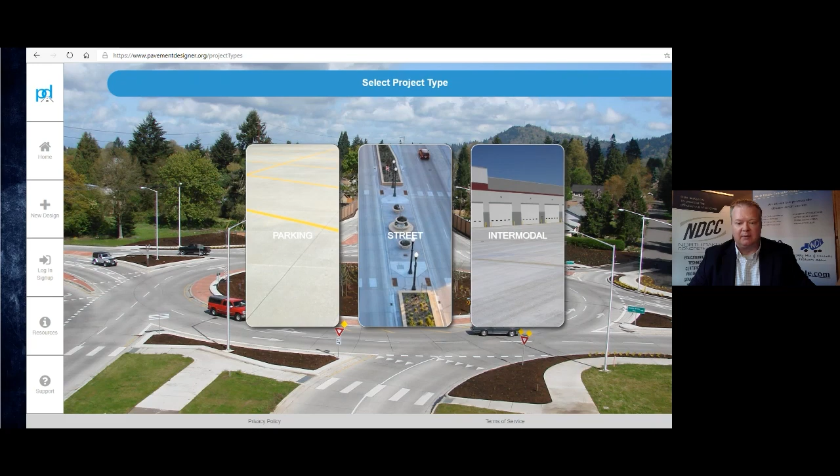We are fortunate to be joined today by Eric Ferrebee. Eric is the Director of Technical Services for the American Concrete Pavement Association. He's responsible for research projects and was one of the leading developers of pavementdesigner.org. In this capacity, he's not only helped develop the software, but he's conducted several training sessions for it, and he continues to be on the team that constantly reviews and enhances the program. Eric earned his bachelor's and master's degree in civil engineering from the University of Illinois at Urbana-Champaign. He also serves as the ACPA staff liaison with the Concrete Pavement Technology Center in Ames, Iowa.

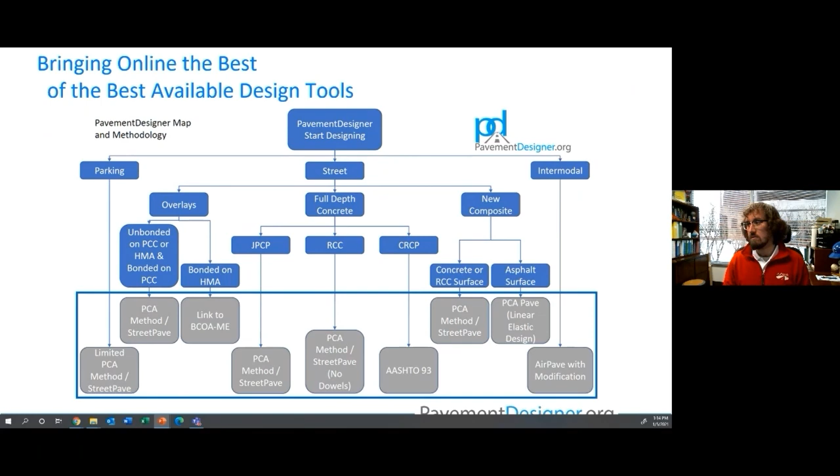Looking at our map, the first thing we're going to talk about today is parking lot design. How do we design a parking lot using pavementdesigner.org? Before we get to that, I always like to talk about the other ways we can actually design a parking lot. What are the ways you may have heard of or be familiar with that ring in your head before you think Pavement Designer, and how do they compare?

The different ways you can design a parking lot that you may be familiar with are AASHTO 93, Street Pave, or ACI 330 design guides. AASHTO 93 is more of a highway type design guide, and we'll talk about that when we get to streets and local roads, but it's not really something that trickles down well to parking lots.

We also have Street Pave, which, if you've ever heard of it, is actually the predecessor for Pavement Designer, but that methodology has actually been incorporated into Pavement Designer as part of our design process. So it's actually what's powering a lot of the designs in pavementdesigner.org. You'll notice the PCA method was featured on that map in the previous slide - that's what was built into Street Pave, and then Street Pave evolved into pavementdesigner.org, which is the free tool that now exists.

But the thing that's really made for parking lots besides Pavement Designer is these ACI 330 design guides that exist. There was one released in 2008, and I believe they're still working on finalizing the current guide. But these design guides are fairly limited in what you can do - you're really designing based off of design tables.

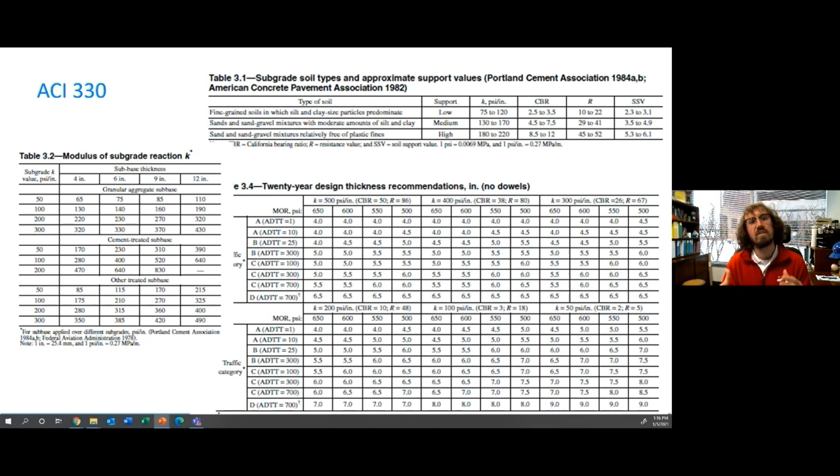You can see some of what those design tables look like from the 2008 guide here. So you're fairly limited on what you can do - you have limited sub-base sections, so limited structural support, also limited subgrade support as well. And you also have limited inputs in terms of the traffic type you're seeing and how much traffic you're seeing. So you're limited in what you can really do with those existing design guides.

So they're a good place to start if you've never designed a parking lot and you're looking for good information. ACI design guides have a lot of good information, but in terms of actually designing the pavement, it's a little bit limited in what you can do. Additionally, these ACI 330 design guides are actually based on the same methodology as Pavement Designer - the 2008 guide was based on Street Pave design runs.

The new guide that's just coming out is actually based on Pavement Designer design runs, so it'll be a one-to-one comparison if you're looking at the ACI guide versus pavementdesigner.org. It's actually the same design methodology. Pavement Designer is a really robust tool for designing parking lot concrete pavements.

A little bit about Pavement Designer's methodology for designing concrete pavements: it's using a modified version of the Streets module that we'll see a little later on. It's modified for simplicity's sake, and to be more focused on the type of loading we'd see for parking lot facilities. If you compare the parking module versus the street and local road module, it's a little different, but based on the same methodology. A little later on I'll tell you the exact differences so you can better understand that.

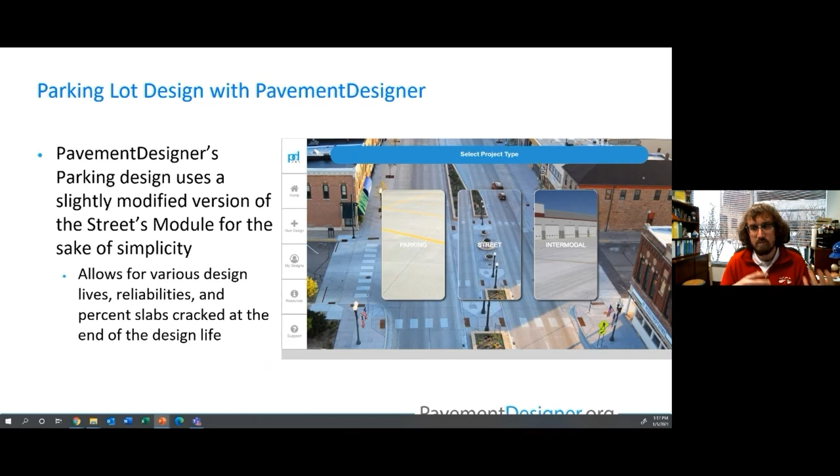All right, so let's take a look at a parking lot design using pavementdesigner.org. We're going to keep it a really basic design where we're designing for a bus terminal that serves about 50 buses a day. We know we have an existing subgrade that's a clay soil, fairly weak type soil, something we typically see here around us in the Midwest.

All right, let's switch over to pavementdesigner.org. As I mentioned, it's a free tool, so you can go to pavementdesigner.org and start designing without even creating an account. You don't need to create an account to start designing concrete pavements with Pavement Designer — you just have to go to the website.

Now, I have created an account. I've used it quite a bit because I do pavement designs quite a bit. When you do create an account, all you need is an email and a password — we don't require any extra information. So it's fairly simple to sign up and create an account.

The big benefit of creating an account is that you can save your designs online and access them from anywhere, any computer that you have. So it comes in handy. We'll see the My Designs features in a little bit, but let's go through and actually do that parking lot design that I just described.

So the first thing we have to do is start designing. We click on Start Designing, and you'll see we're brought to our first decision point. The first thing we have to do is select what type of project we're going to do: parking lot, street and local road, intermodal, or industrial type facility. If you hover over any of these tiles, you'll see a little flip screen that gives you more detail on what's featured within each of these modules.

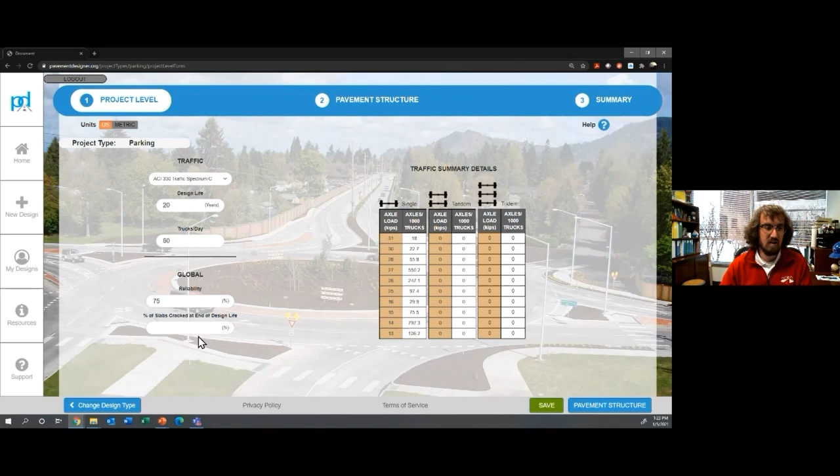And our percent slabs cracked is going to be somewhere around 15%, maybe 20%, depending on how conservative you want to be. So I'm going to say 15% slabs cracked at the end of my design life. Now that I've filled in all of my traffic and global details on the project level, I can move to my pavement structure details.

In my pavement structure details, I need a little information on the subgrade, the concrete materials, as well as the structural layers in between my concrete surface and the subgrade, so the sandwich layers in there. Now, all that I know about this facility that we're designing for right now is that I'm designing on an existing subgrade that's a clay soil, so it's not a very good support system.

So in the parking lot module, you can see that we have a few descriptors that are describing various soils. We have this first one that's silts and clays. We have this one that's sands and sand gravel mixtures, and then sand gravel mixtures that are free of fine particles. So we know that we have a clay soil, so we're going to be in this low support realm, and we can just select that.

And so when we do that, it's actually going to populate our subgrade CBR value and give us a resilient modulus. So if we actually have a subgrade value that we know, we can go in here and override that, say it's a CBR of 4. In that example, you can see how it's going to change where that support system is. I know that I'm going to design for a CBR of 3 in this example.

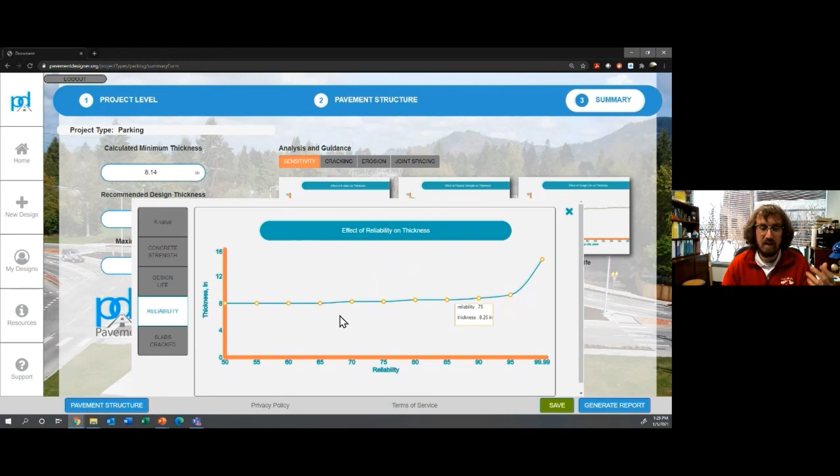We also have—we can see how the design life changes this, we can see how the reliability changes this. As I mentioned, we probably don't want to go too high with our reliability, as this is a low volume, low speed facility that's not seeing a whole lot of traffic, so we're in here around 75%. If this was, say, a collector type facility or an arterial, we may be up in the 90 to 95% range, and we may see some additional thickness required.

And then we have percent slabs cracked, kind of the inverse of reliability. If we want to have very few percent slabs cracked at the end of our design life, we're going to need some extra thickness—of course, then we're not really failing the pavement at all anyway.

We also have cracking and erosion tables, and I'll talk about these when we go through a street design. We also have joint spacing, which gives you an idea of how the joint spacing was actually calculated. Where does that come from? Why are we recommending 15 feet? Why not 17 or 18 or 20? Or why not 14 or 13? This gives you a little bit of information on how that was calculated.

On Pavement Designer, you can actually generate a report as well. If I generate a report, I can provide some additional information like design name. In the parking example, you can provide a designer's name, route, zip code, owner agency, a little bit of extra information, and then click download and view report. If you have a pop-up blocker on, you'll have to disable that for Pavement Designer. You should get the report right there on your screen, and you can see all the different layers and all the different inputs we had throughout the design. It'll also download to your downloads folder, so you can have a copy of that design report.

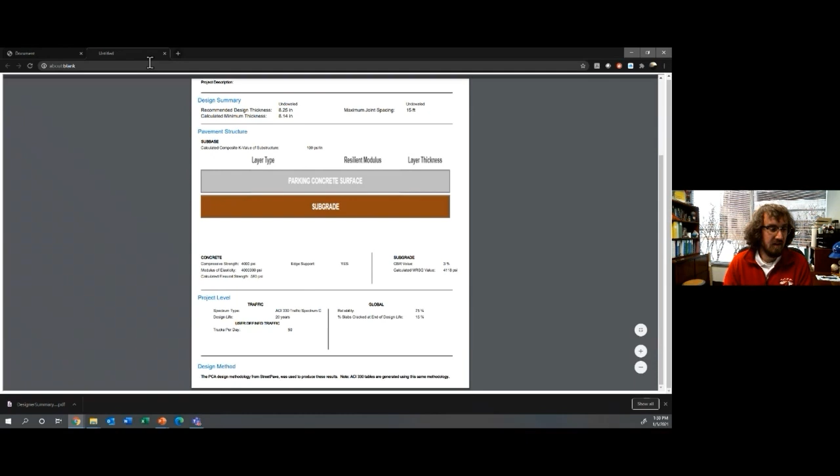If you're logged in and you've created an account, you can also save this design, and that'll save the whole design for you. You can see I already typed in the design name. I can choose a project folder, or create a folder, and save it. If I want to come back to it later or talk to somebody about it, I can save it if I've created an account, and then access it in my designs. Within my designs, you can see I've used Pavement Designer quite a bit, and I have quite a few folders with various examples.

I just saved this parking example here, and you can see it's saved down here. So when I have those saved designs, I can either go in and edit those designs, or I can actually create a duplicate of it if I want to change one of those inputs and keep a copy of both designs.

I can actually send this to somebody. So if I wanted to share it with Art and say, hey, can you take a look at this? You can type in his email address and it'll send him a copy of it, and then he can look at it and tell you what he thinks, or he can send it to me and I can tell you what I think. And then you can delete these designs as well.

So you have a lot of features that you can access by just creating an account with your email and password, and that's all we require to do that. It's fairly easy, and it's got some good extra resources there too.

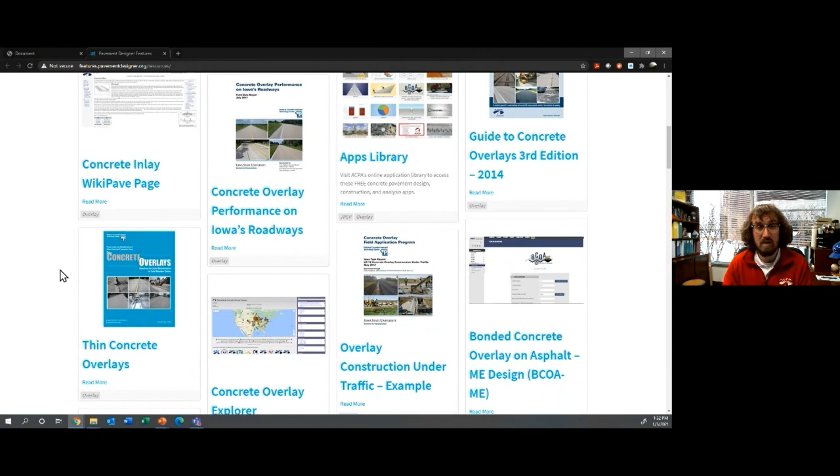Speaking of resources, Pavement Designer has a fairly good library of resources related to pavement design, covering all the different types of designs that Pavement Designer can do. As I mentioned that map earlier, you can see the Pavement Designer map and methodology right there, one of the first things we have. We also have some intro videos in case you want to rewatch me going through one of these designs, which will give you a little detail on how to do that. There are a lot of good resources from ACPA and from the Concrete Pavement Technology Center as well. All of these are free, great things relating back to pavement design.

The other thing I want to show you on our first tour of Pavement Designer is the support section. This is a place where you can find the contact information of the national associations that contributed to the development of Pavement Designer, as well as all of our state associations. Say if you're designing outside of North Dakota and you're looking for Art's counterparts somewhere else, you can go here and find the contact information for those various states depending on where you're working on a design. So another good resource on pavementdesigner.org.

Alright, so that's our first tour of Pavement Designer, and it goes through the parking lot module.

So we've gone through the parking lot module. Next up, let's talk about the street design module, and how we design concrete pavement streets and what all is featured within them.

With designing concrete pavements and streets within Pavement Designer, you have a lot of different things you can design for. We can design for conventional jointed plain concrete pavement, for overlays whether bonded or unbonded, on asphalt or on concrete - it doesn't matter, you can design it with Pavement Designer fairly simply. We can also design RCC, continuous reinforced concrete pavement, and composite pavements as well. So there's a lot of versatility within here.

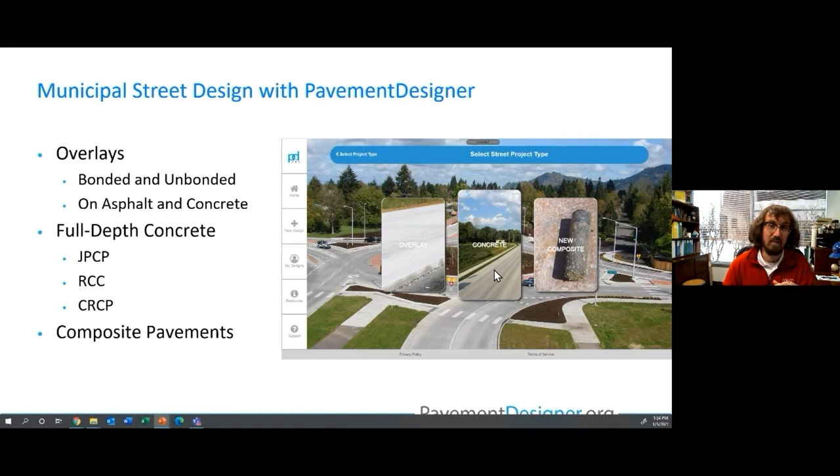If we're designing a street and local road, we're doing full depth concrete, as you see in this picture, and we'll see how that looks in a little bit. We're going to focus mainly on jointed plain concrete pavement here, but know that the same design process applies - you'll see basically the same steps for each of these different types of facilities. You may just have some extra inputs to deal with depending on the type of design, if it's not a conventional full depth concrete pavement.

Similar to parking lots, let's talk about some of the other ways we would design municipal streets and local roads that you may be familiar with, and what some of the benefits and drawbacks are of those design methodologies.

Here we're going to talk about AASHTO 93 for a few minutes. We're also going to talk about AASHTOWare's Pavement ME design tool, which is kind of the Cadillac, the best way to design concrete pavements that exist these days. There's also the ACI 325 design guide and StreetPave. So let's go through these briefly and talk about the differences and the benefits and drawbacks.

Our first one is AASHTO 93. If you've ever done a pavement design, you've probably either used AASHTO 93 or at least heard of it. As the name implies, it's been around since 1993 - nearly as old as I am, so it's getting fairly old, but it's actually way older than that. AASHTO 93 is based on the AASHTO road test, which was performed between 1958 and 1960.

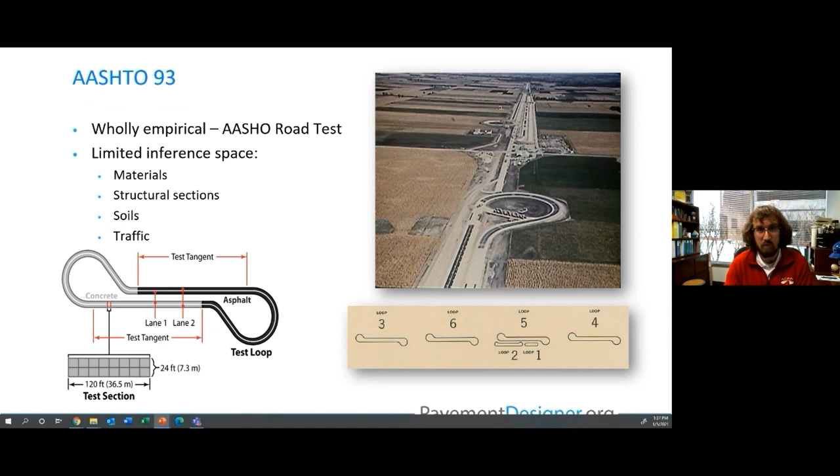It's based on a very limited inference space. We had limited materials local to Illinois, limited structural sections - with 6 test loops we didn't have an extensive amount, around 360 concrete sections, a reasonable number but not huge - and again local to Illinois with Illinois materials and soils. We only had 2 years of traffic data, so not a whole lot of traffic information either. So we had limited structural sections, limited traffic, and limited observations, and that's what's built into the AASHTO 93 design guide.

You can see examples of the asphalt and concrete sections here - notice a lot of the concrete sections were fairly thick. This is because the AASHTO road test, and the AASHTO design guides, were really focused on highway type pavements, built for interstate type facilities and very heavily trafficked roadways. So our concrete sections tend to be thicker, and you'll see why that's one of the drawbacks in a few seconds. You can also see some of the trucks loaded on the AASHTO road test - after those 2 years they had about 1.1 million load repetitions of these types of trucks.

So a fairly limited amount of data that we're actually designing with. Now, at the end of the AASHTO road test, here's one of the big problems with the AASHTO 93, the older AASHTO design methodologies. About 30% of our concrete pavement test sections were failed, so 70% were still in decent condition. Now that's a big problem when you're doing a road test, because you're trying to get a full performance characteristic history of how concrete pavements perform throughout their life. So if you don't fail your test sections, how do you know how your pavements are actually going to perform?

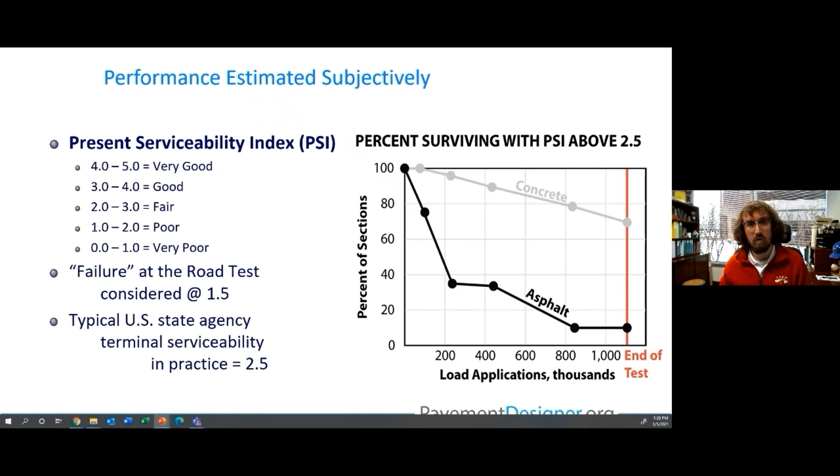This is a big problem with the older AASHTO empirical design methodologies. They're based on a limited inference space where we don't actually know how the concrete pavements are going to perform, so we had to predict how they perform. We have different projections of how this would actually look. Now we're designing pavements for up to 100 million design or load repetitions, way outside of the inference space of the AASHTO road tests. That's a big problem with using the AASHTO 93 design guide for designing concrete pavements - we really had to project how pavements were going to perform outside of the inference space. And so that's a problem.

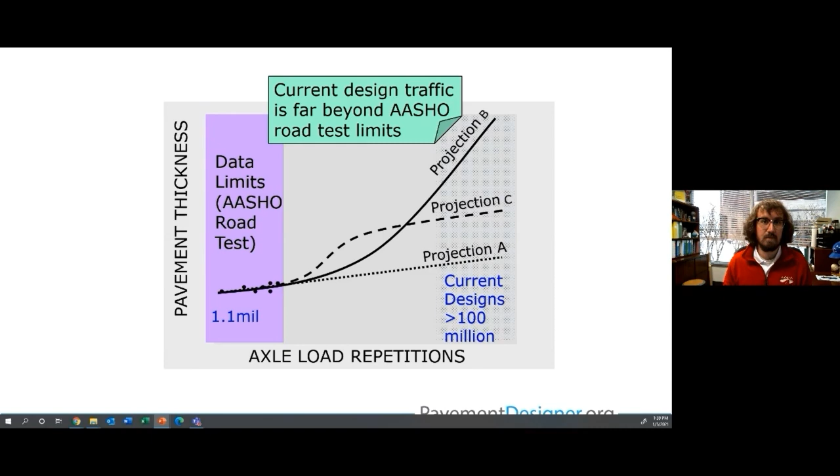And so that's why AASHTO created Pavement ME Design, the new pavement design tool for designing concrete and asphalt pavements. But Pavement ME is really made for federal and state agencies. It's made for high-level highway type pavements, interstate pavements. It's not really made for streets and local roads and parking lot types of facilities. So it's a great design tool, and it's really kind of the best way to design concrete pavements, but it doesn't really lend itself well to trickle down to smaller type facilities or agencies that don't tend to do pavement design a whole lot. It is fairly complex.

That's one of the reasons why we don't see Pavement ME adopted. It hasn't been adopted by all of our departments of transportation. It also is not trickling down to cities, county highway departments, and some consultants that don't do pavement designs all the time as well. Additionally, it's fairly expensive - one license for one year of Pavement ME is around $6,000, so it's very expensive. But again, it's for more of the DOT type facilities, which is why we don't see it used all the time.

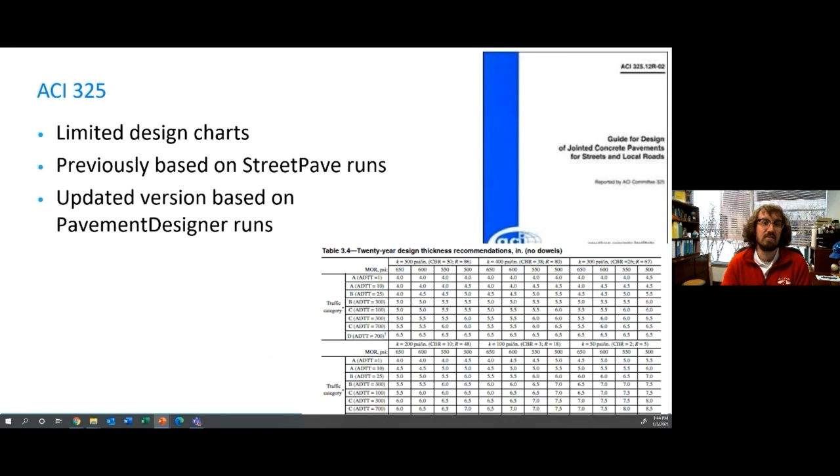So let's talk about Pavement Designer and where its roots are in terms of design methodology. Pavement Designer for roadways dates back all the way to the 1960s. We originally developed this back then, called the PCA method. It's evolved and we've improved it over time.

In the 1980s, there was a big step forward when we introduced erosion into the design model. Then we released it as StreetPave in the 2000s, updated it again in 2012 to become StreetPave 12, and now we've released it for free as pavementdesigner.org, featured within there.

It's a fairly robust tool that looks at failure criteria such as cracking, faulting, and erosion, which is good because that's how our concrete pavements actually fail. If we revert back to AASHTO 93, we're really designing based off a serviceability index, which groups all the stresses together rather than actually looking at the stresses over time. Here we're actually looking at the stresses, cracking, and erosion.

This design methodology was more tailored for streets and roads. We basically recognized that the AASHTO road test was for highways, so we needed a design methodology for streets and roads, and so the PCA method was born.

Pavement Designer has actually been approved by the Minnesota Department of Transportation for their cities and counties, and this was fairly recent. They just released this in November of 2020. They did a research study and looked at how it compared to their own in-state design module, MnPAVE Rigid, found it was comparable, and now allow for the use of pavementdesigner.org.

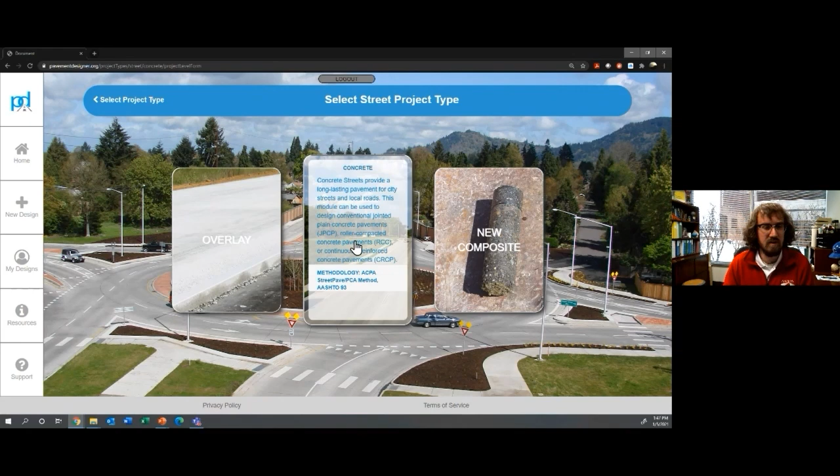So if I go into my full depth concrete pavement, you can see we're back to our 1, 2, 3 step process: project level details, pavement structure details, and summary details. First thing we have to do is select a traffic spectrum. Now, all I know is I have about 100 trucks per day. It might be a collector, it might be a minor arterial, I'm not really sure, so I'm going to go ahead and turn on help screens.

So you see this help question mark here on the top right, you can turn this on and off. I usually have it off because I use Pavement Designer quite a bit. So you can turn it on.

Every time we turn on the help screens, we have these hoverovers that give us a little information about the input. But if we click on more information, we can see we've got a lot more detail on what this input actually is.

So I know I have about 100 trucks per day. If I look in my traffic, my average daily truck traffic, 100 falls between 40 and 1,000. So I'm going to say I'm a collector type traffic category.

So I know my traffic category now is a collector. You can see I've got a few more traffic spectrums within the street module. I can also add a custom traffic spectrum in here as well. I believe you have to create an account and log in to do that because it saves on your account, but you can do it.

Next thing we have to do is determine our design life. Again, we have to determine this as designers. So I'm going to say 30 years. I know I've got 100 trucks per day.

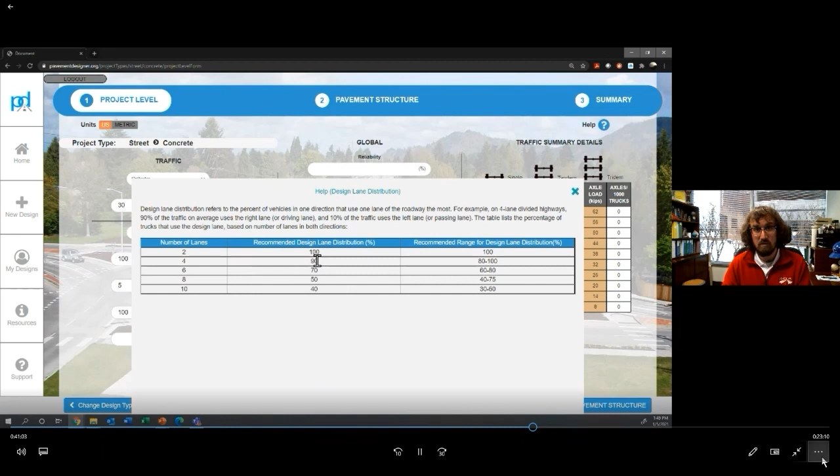Similarly with design lane distribution, if I have 2 lanes going in my northbound direction, I may say 90% are in my design lane and 10% are in my passing lane. If I click on more information, I can see if I have a 4-lane facility, 2 in each direction, I may have 90% in my design lane, 10% in my passing lane.

So let's say I have a 4-lane facility with 2 lanes in each direction. I'm going to say about 90% of my traffic is in my design lane, and 100% of those 100 trucks are in my design direction.

So last thing we have are reliability and our percent slabs cracked. Let's take a look at reliability. For a collector, it's probably going to be somewhere in the 85% range, which is exactly what we see here within our help screen. So about 85% for our collector would be a good starting point.

Once we get to the summary, we can see how all of these inputs impact the design, and we can change this with those helpful sensitivity plots. So the next thing we have is our percent slabs cracked, and it's going to be about 15%, somewhere 10 to 15% is usually pretty good.

One thing we didn't have in the parking lot design that we have now in our street design is calculated traffic results. This is basically taking that 100 trucks per day and 5% traffic growth rate and those directional and design lane distributions, applying all of that over 30 years and averaging it out for a daily traffic it's designing for, about 200 trucks a day. If we look at how many trucks over the entire design life we're designing for, we're at about 2.1 million.

All right, so we filled all that out. We can go on to our pavement structure. Here we can determine if we're doing a full depth jointed plain concrete pavement, which is our conventional concrete pavement, or RCC or CRC. So we're going to just stick to jointed plain concrete pavement.

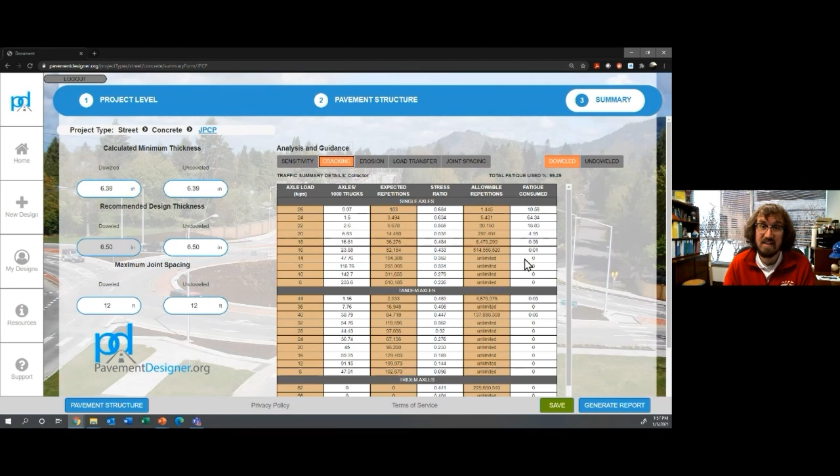If we look on the erosion, the faulting side, you can see here that we're not consuming a whole lot of our erosion life, and this is because we're in a doweled scenario. If we switch over to undoweled, you can see a little bit more faulting and erosion, but it's still not significantly high. So that tells me that we're really failing because of fatigue -- we're failing by cracking rather than faulting. So you can see here, tandem axles tend to be more damaging on the erosion side.

Okay, so we still have all of our sensitivity plots. We have our load transfer tab. We also have that joint spacing tab telling you how this was calculated and why this is our recommended maximum joint spacing for this design scenario. So we've got a lot of good information to help inform the design that you're doing, a lot of good information here as well.

So we still have our generate report. We can also save if we've logged in and created an account, and we can go through in here and go back and change any of our inputs that we had, and go back and edit our design however we want. So a lot of good freedom in terms of what we can do with PavementDesigner.org.

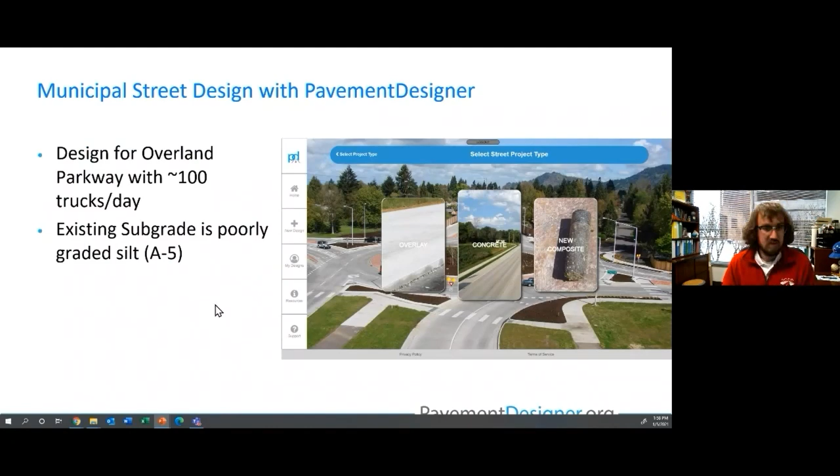So let's go back to our presentation. Let's take a look at another design example.

And so this is an actual design that I received, and somebody said, hey, can you look at this AASHTO 93 design and tell me if you think this is realistic, knowing that what we've seen over the years is that AASHTO 93 tends to result in overly conservative, unnecessarily thick concrete pavements for various types of designs.

So the design that they had was about 8,000 trucks, or around 20 million ESALs, if you're familiar with AASHTO 93 -- doesn't matter if you're not. They also had a 90% reliability with 5% slabs cracked. They had a 6-lane facility.

They had an R value of 20, that's defining the subgrade. They had a modulus of rupture, or flexural strength, of 630 PSI with an elastic modulus of our concrete of 3.5 million. They assumed edge support, so they had a tied concrete shoulder or a widened slab. They had an asphalt subbase on a cement stabilized subgrade, and they assumed a K value of 160 PSI per inch.

Okay, so the AASHTO 93 design that was performed came up with 11 inches of concrete. So real quick, let's go through and see what Pavement Designer comes up with in this type of design.

So let's start new design. Oh, don't want to save. Let's go ahead and start new design. Go ahead and start projects. I'm going to go to concrete pavement streets, full depth concrete pavement. And all right, so we're going into our design.

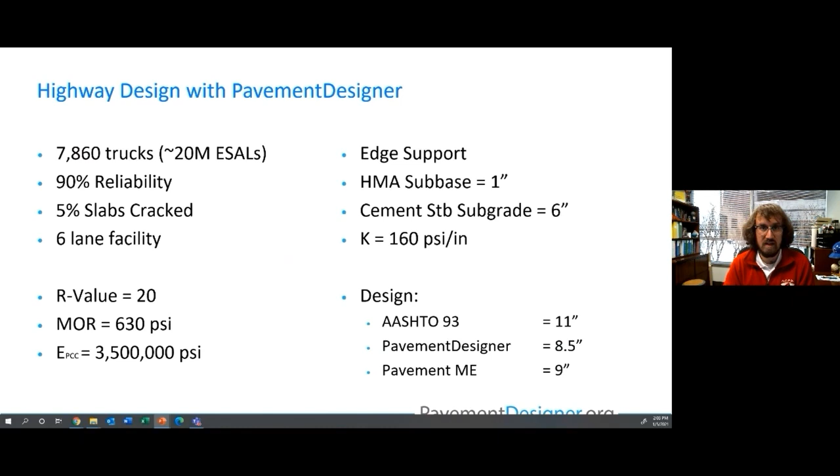I did both of these designs, one with Pavement Designer and one with Pavement ME. With Pavement ME, the cracking is kind of what's driving the design, it's what's getting closest to failure, but still they only predicted 9 inches of concrete was required for this type of design. So it's really great to see those two lining up, because they're both mechanistic empirical approaches to pavement design, so they result in pretty realistic numbers for the pavement design.

All right, so the last thing I want to touch on with the street design module, and I'm going to go quick through this because I'm running out of time and I've got one more thing I want to cover, is there's a module within Pavement Designer where you can estimate the traffic given an existing asphalt design. So let's say you're a county and you know that your typical pavement design is, let's say, 3 inches of asphalt.

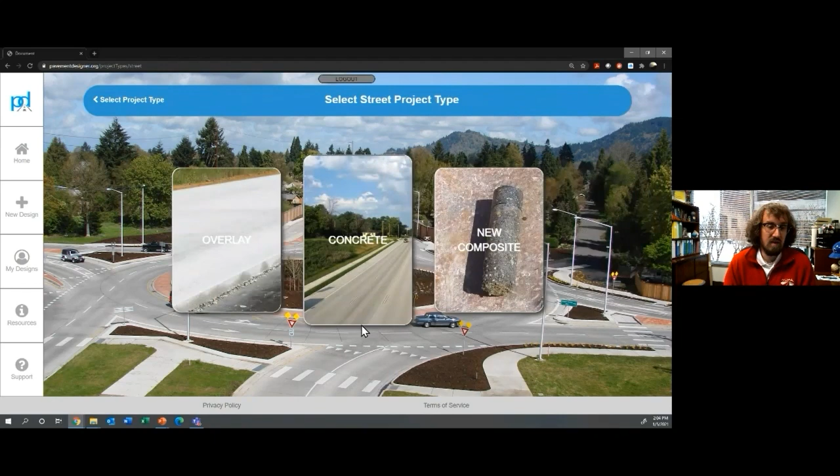Let's do what I've got printed here: 4 inches of asphalt on 8 inches of granular base, with a resilient modulus of around 4,000 PSI for whatever you're designing for in this case. So if that's all the information you have, you don't typically do a pavement design, you just stick with that example, 4 inches on 8. You may be used to using that, but you may also want to see what a concrete alternative might be for that type of facility.

So if you want to do that type of analysis, where you want a concrete design that's comparable to that, you can see in here, if we go to, let's say, a collector type facility and we know we want it to last 20 years, we can go in here and instead of doing user-defined traffic info, we can actually estimate it from an asphalt design.

So this is going to take that existing asphalt design that you may be familiar with, that may be what you always pull out of that 4 inches on 8. And it's going to figure out how many trucks a day that pavement is going to hold given that 20-year design life.

So I said granular base. The layer coefficient for granular base is usually around 0.14 to 0.16, and then a thickness of, let's say, 8 inches. This is going to be based on AASHTO 93, because AASHTO 93 is kind of the main design used for asphalt pavements for this type of facility.

And let's say we've got a resilient modulus of 4,000. So you can see the other types of inputs that we need for an AASHTO 93 design. So it's going to actually calculate the structural number, calculate the flexible ESALs, then calculate the average trucks per day and the trucks over the entire design life.

So it's calculating that based on that assumed 20-year design life that we have and the type of traffic that we have here. It's basically saying that if we want this pavement to last 20 years, based on AASHTO 93, we would assume that it's only going to carry about 50 trucks a day. So that's kind of what's going on here.

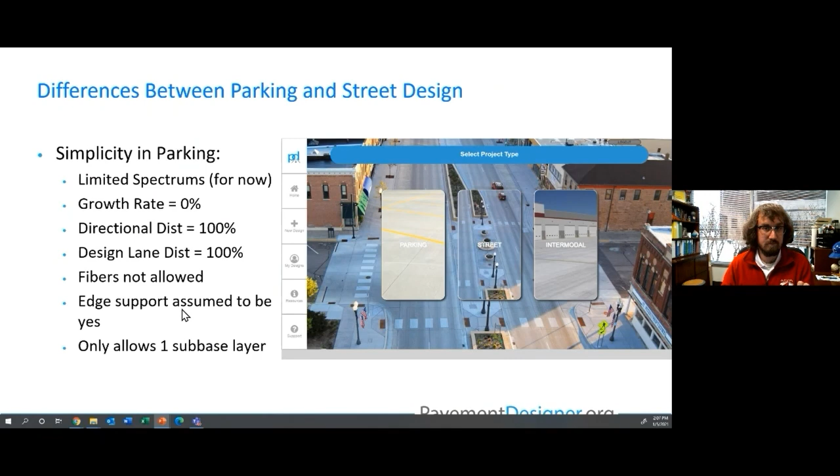So if you copy these in your street design, it will exactly match up with the parking lot design. So that's a little bit on the differences between the parking and street design.

Okay, so last thing that we're going to cover, we're going to talk briefly about the intermodal design. Now, before we get into this, I should mention that we are in the process of updating this, making it a little more user-friendly. So if you've used it before, or if you're looking at it now, you may see that it's a little more complex than the other designs that we've talked about. But we are working on making that a little more user-friendly, so look for those updates sometime here in 2021.

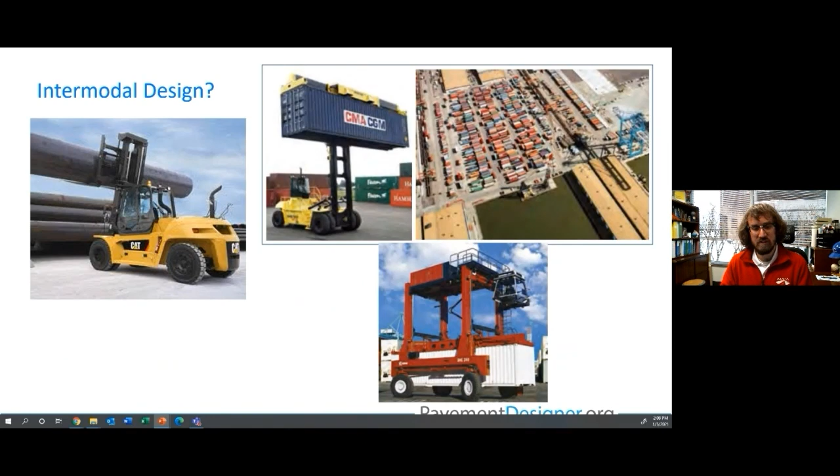So intermodal design within Pavement Designer is really looking at designing for really heavy type vehicles like forklifts or container loaders. It's not really looking to design for over-the-road traffic like your conventional trucks. If you're doing a facility that's just designing for trucks, but it's an intermodal facility, use the parking lot design or the street design—that's going to get you your best design. This module is really for these types of vehicles, your forklifts, any type of non-over-the-road vehicle that still has pneumatic tires that may be significantly overloaded. It's designed for those types of vehicles.

So you can see the other ways that we can design these intermodal or industrial type facilities. ACI 330 does have a pretty good guide that goes through how to design for these types of facilities and the things you need to watch out for. They do actually list ACPA StreetPave, which again is the precursor for Pavement Designer. They also list Pavement ME, which we've talked about—great design methodology, not really great for designing for forklifts and container loaders and stuff like that.

And they also list TC Pavements and OptiPave, which is a good tool. It's not used a whole lot in the US, but it is used quite a bit in South America and other parts of the world. And then they list ACPA's AirPave.

ACPA's AirPave is actually developed for designing aircraft, but it can be used for designing these types of vehicles where you have some odd shaped loadings, odd tire and stress distributions. That's what's actually used in the intermodal industrial design within Pavement Designer.

Let's do a real quick example as we're finishing up here. We're going to design for a Cat 986 loader, 130,000 pounds, 12.5 foot wheelbase with 10-foot axle width, and a tire pressure of 90 psi.

Okay, so going back to Pavement Designer, let's go back to our home. We can start designing. Again, intermodal. So here our flip screen tells us that we're looking at non-over-the-road traffic. We're looking at container loaders, excavators, any type of vehicle that has pneumatic tires that wouldn't fit in over-the-road type traffic.

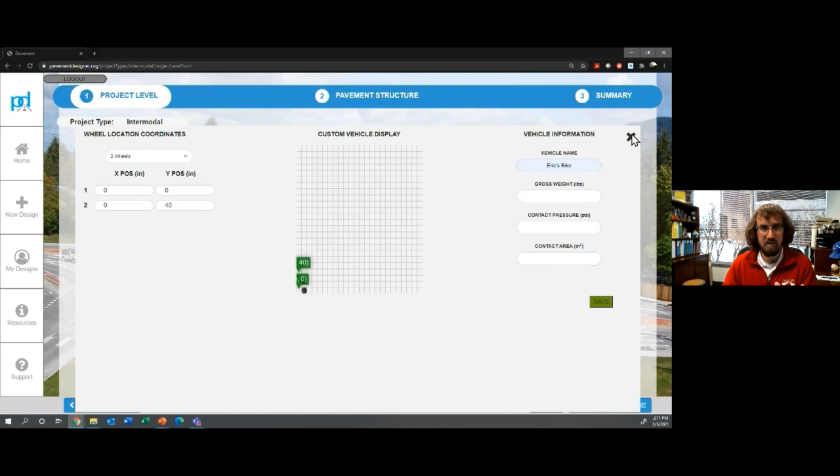So let's stick to our Cat 986 loader. That's the vehicle we're designing for. Then we can move on to our pavement structure details. You can see that we've got everything just like we've seen before. We're going to go through this really quickly and put that right on the subgrade.

Let's see what our design summary says for this Cat 986 loader. It says we need about 10 inches of concrete. You see that we don't have quite the same sensitivity plots that we had with the other design modules. It's one of the limitations of this design methodology, but you can see the design thickness and the minimum thickness for this type of vehicle, and this is pretty much designing for the entire life of pavement.

That's another thing we're looking to add in — number of load repetitions, in case you have a vehicle that's not used every day. So we are looking at updating this, but you can use it right now and still play around with it and look at how the intermodal industrial design is done within Pavement Designer.

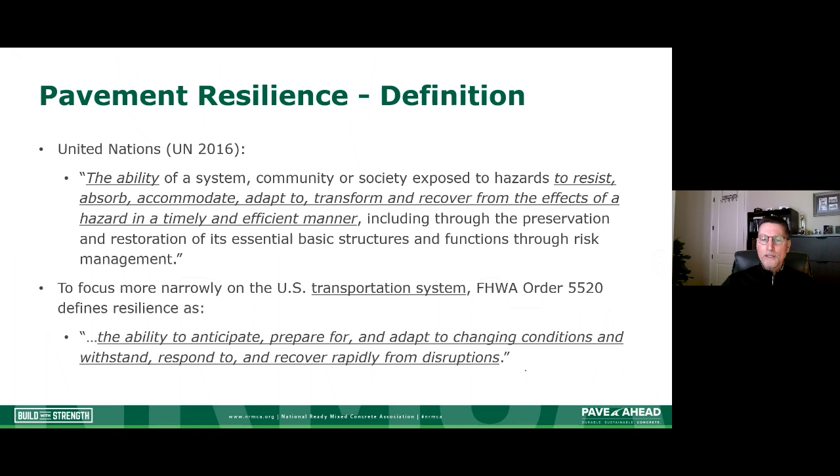That's resilience. When we talk about sustainability, we're talking about the pavement's ability to achieve some engineering goal for what it was constructed for. Hopefully we can preserve and maybe even restore some of our surrounding ecosystems through the construction of that pavement, and we use our financial, human, and environmental resources economically. That's the triple bottom line: social, economic, and environmental. We also want to make sure we meet basic human needs, such as health, safety, equity, employment, comfort, and happiness. So that's what I'd claim sustainability is.

Now, when we talk about sustainability, we're talking about broad impacts. We tend to think about sustainability in terms of greenhouse gas emissions, CO2 equivalent or carbon burden. What does our infrastructure, our pavement, impact environmentally? But sustainability can also mean how much energy consumption or savings an asset provides. Does it impact habitat and water quality, or the hydrologic cycle of rain absorption and evaporation? Am I impacting air quality or community mobility by adding a pavement or a lane—access to the rest of the community, how we move freight? All of that can be an impact when we talk about sustainability. Just keep that in mind as we go through.

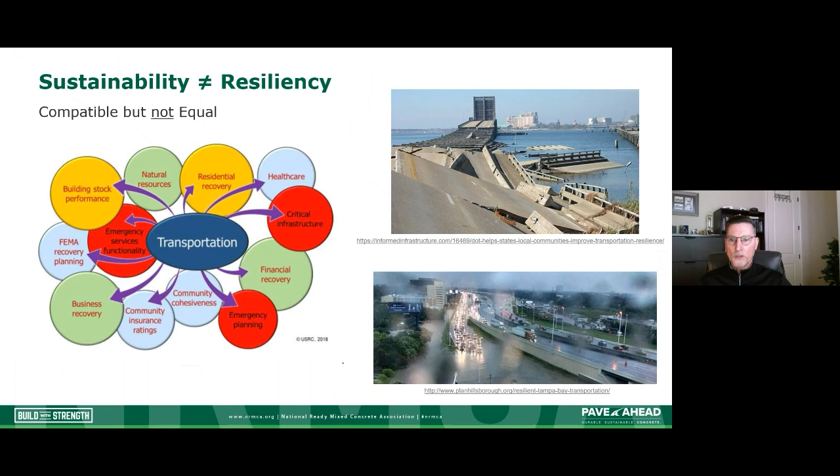So let's talk about resilience a little bit. Get a little bit deeper into what it means, but also when we're talking about how do we design and construct resilient pavements. Resilience is that ability to anticipate, prepare for, adapt, withstand, respond, and recover. So if we have some sort of an event that occurs, we will lose performance. So we'll lose the ability for that asset, that infrastructure, that pavement to perform adequately. So there will be some sort of a recovery time, and then we'll kind of be back either near or at or near our performance, or maybe even above our performance prior to that hazard or event happening.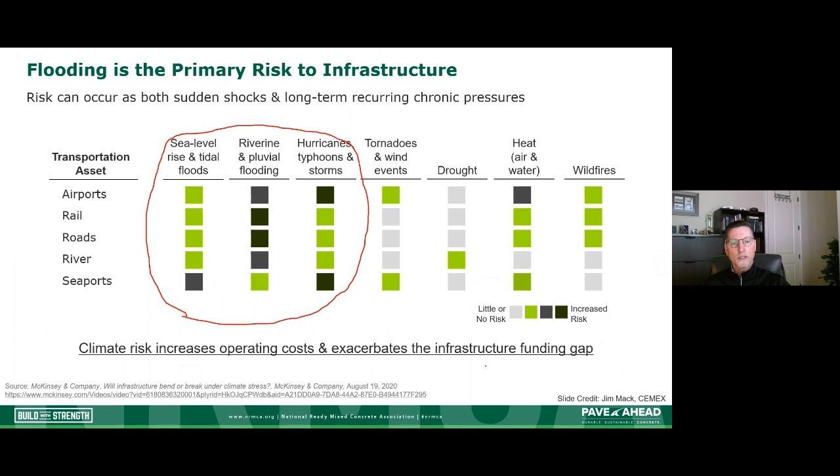And there's three different types of flooding. The first would be severe flooding from natural disasters. Think of our eastern coast, think of the Gulf Coast, and in particular Houston. Houston, over the last several years, has had several significant flooding events, the worst being Hurricane Harvey. So we have hurricanes, we get tidal rise, we get significant rain, and we have flooding that can occur, and our pavements can be flooded and inundated for a very, very long time.

Sometimes it can be weeks. And when we have that, we have a reduction in strength of our pavement, typically below the surface.

Another way flooding can occur is in the Plains states. We may see significant river flooding going over the embankments during the snow melt, the springtime. We tend to see that in these Plains states, where we get overtopping of our river banks and get significant flooding. Again, we'll see portions of our roadways that are flooded for a very long time.

And then in our coastal zones, with sea level rise, whether it's a permanent rise in sea level or more frequently now, tidal rises, daily changes in tide can actually flood streets. We see that a lot in Delaware, Florida. A lot of these coastal cities will see this tidal sea level rise that occurs throughout the day. Again, we can have that inundation of the pavement that can cause us problems.

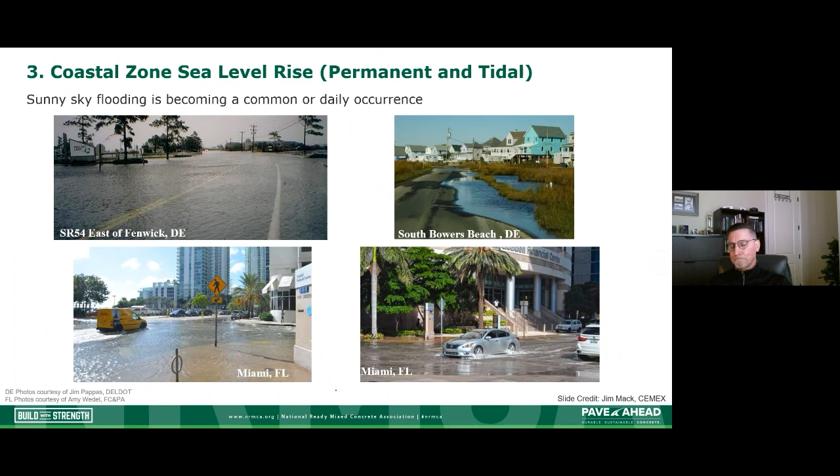So we talked about inundation a little bit. There are actually two different types of flooding that can occur. The first one is what we call washout. That's where you get a really rapid flow of water, very high current, and that basically scours away the material below the pavement and eventually into the pavement, and the surface is washed away. Now, the pavement type, whether it is a flexible pavement or a rigid pavement, really has no impact on the ability to resist scour. It's just going to happen. Not much we can do about it in terms of the pavement type.

Where pavement type really does make an impact is when we're talking about inundation. Several states, counties and cities have looked at the difference between the ability of a flexible pavement, or a typical asphalt pavement over top of granular material, to recover from and perform adequately after inundation. We see a big difference between flexible and rigid pavements. Rigid pavements tend to recover quicker, and we don't see as significant a loss of performance with concrete pavements.

So that's a little bit about resilience, and we'll talk in just a minute about some of the things we do to design to incorporate sustainability into our designs. We'll talk about that, incorporate resilience into our designs. We'll talk about that in just a moment.

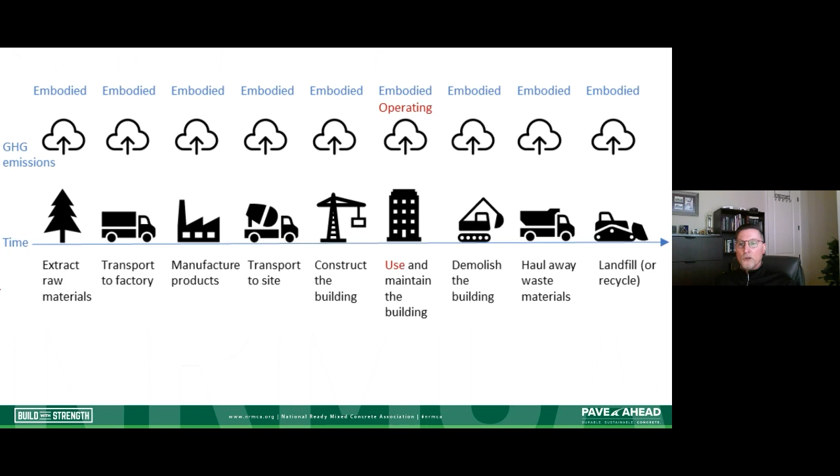So what might that look like for a pavement or a building? Well, we start here in terms of extracting raw materials. And when we do that, we have some sort of greenhouse gas emission. Then we have to transport that stuff to the factory, manufacture it, transport it to our construction site, and construct it. All of that is embodied carbon.

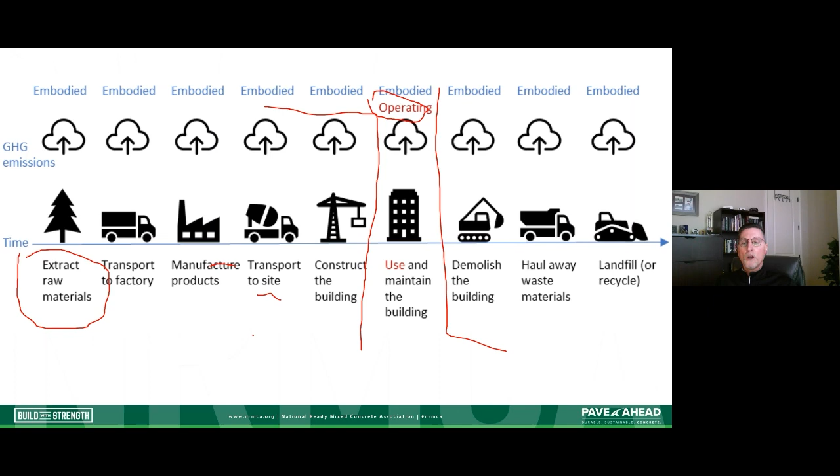When we use our building or our pavement, that's our operational carbon, but there's also embodied carbon that's allocated in the use phase. And then at the end of the life of that infrastructure, we demolish it, we haul it away, and we take it to a landfill. Again, that has embodied carbon as well. So it's just important to understand those two things when we're talking about environmental burden or impact.

Now, when we are talking about sustainability, there's a couple of different things we can do. This is kind of that reporting portion I was talking about. One is we can simply disclose to somebody, a buyer or an owner or a government, whatever the case may be, what our environmental impact is. The other is we want to be able to look at our infrastructure and compare different types of materials and say this one does a better job in terms of environmental impact than this material does, or this pavement structure does. So that would be comparing.

We utilize what we call environmental product declarations to do that disclosure. Basically what that means is that owner, that buyer, wants to look across the board when they build that infrastructure: what is my environmental impact going to be? And I can ask each person that manufactures for that pavement, for that building, to disclose to me what that environmental burden is.

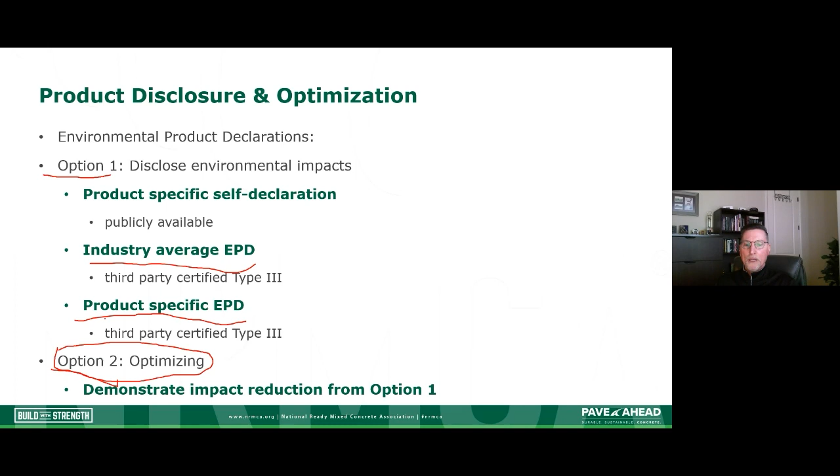The other way that we can disclose is by saying, I'm going to show you how much better I am than the average, the industry average, or some other type of material. So I can utilize the EPD to demonstrate how I reduce my environmental impact from some benchmark that is set, or from the industry average. So we can use EPDs a lot of different ways, but primarily all we're doing there is disclosing.

So if we want to be able to incorporate all those other stages, the construction, the use phase, the end of life phase, we have to incorporate what we call life cycle thinking. And we know this already because we do this in the pavement arena in our life cycle cost analyses. But simply, all life cycle thinking is to reduce a product's resource use and the emissions to the environment, as well as improve its socioeconomic performance through its life cycle.

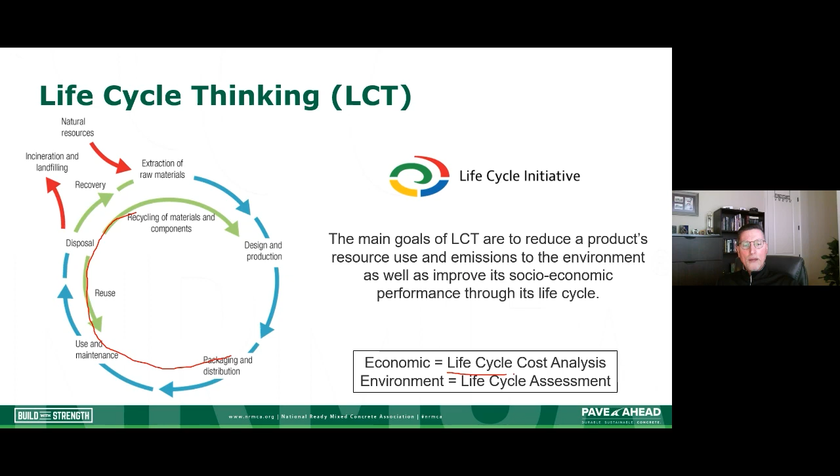So that extraction of raw materials all the way through that life cycle to the end of its use. And again, we do that a lot with life cycle cost analysis. We look at things like our initial cost. What does it cost us to maintain it, rehab it? What's it cost our users when we're using that pavement? And then what is our residual value of that pavement at the end of its life?

So we do that in life cycle cost analysis and kind of evaluate our economic considerations. So it's an accounting, right? We're doing financial accounting there. Same type of thing when we do environmental considerations. Basically, all we're doing is accounting for that environmental impact at the resource extraction, the processing, the placement, the use, the maintenance and rehab, and at the end of life, what do we do with that asset or structure? Do we recycle it? Do we leave it in place? What's the benefit if there is a benefit at the end?

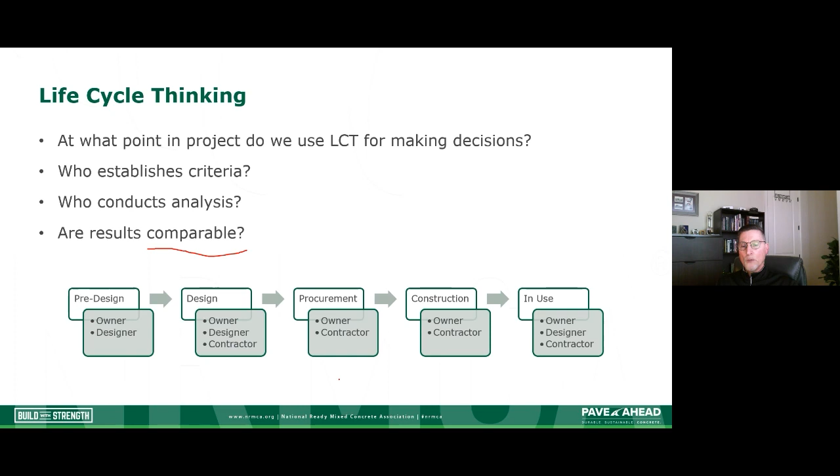So we see that here. Many times what we want to do is choose a sustainability winner, saying design A wins over design B, C, or D. But that's not really the best way to utilize an EPD or an LCA. What we typically want to do is choose the material that's most materially efficient, and then optimize and economize that design so we're reducing the environmental impact of that material. So it's difficult to make material choices utilizing an EPD and an LCA.

So that's an overview of resilience and sustainability. Let's talk a little about how we can utilize materials and designs and asset management in terms of incorporating green elements. We know we can utilize low impact materials to achieve some of our sustainability and resiliency goals. There are many ways to do that, and I'll just touch on a few.

One would be utilizing something called Portland limestone cement. We know that cement manufacturing has an impact on our environment - it's a fairly intensive CO2 manufacturing material. If we can reduce that impact by utilizing Portland limestone cement, that's a great option. It's a blended cement with additional limestone content, optimized for whatever performance it's going to be used for. It's a really easy way to reduce your carbon footprint by about 10%.

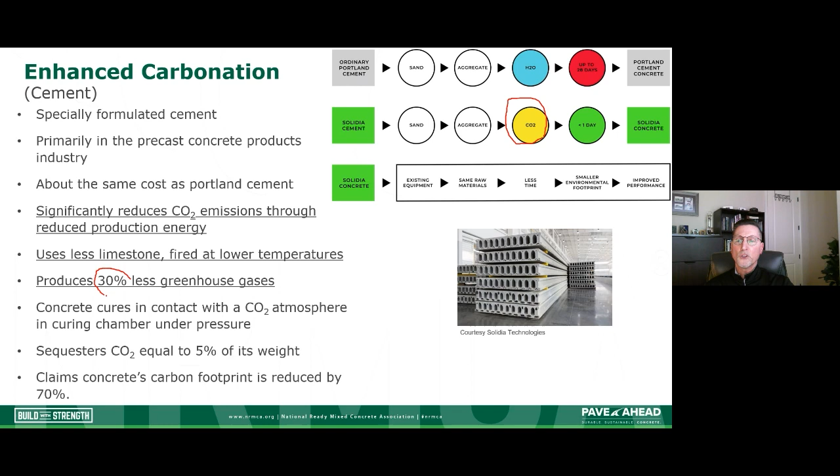Another thing we can do is use a different type of cement - one where we're utilizing the benefits of carbonation. We can change the way we manufacture our cement by adding CO2 into the manufacturing process. When we inject CO2 into that cement manufacturing process, it can chemically react, allowing us to use less limestone, and use lower kiln temperatures in the manufacture of our cement. So we produce about 30% less greenhouse gases - we're actually taking captured carbon and utilizing it in our manufacture of cement.

We could do the same thing in the manufacture of some of our aggregates. We can take captured carbon from other industrial manufacturing, capture that carbon, and inject or sequester it into some aggregates. So we can sequester CO2 by changing the aggregate, if you will. It's another way we can lower our impact - by using captured carbon in our aggregate development.

Another one that we can do is right during the midst of our concrete manufacturing, at a ready mix plant, we can actually inject CO2 into that manufacturing process, and it creates an artificial limestone as it goes through a reaction. As you're mixing your cement, your water, your aggregates, you inject that CO2, and then it sequesters that CO2 within the concrete.

It enhances the compressive strength a little bit, and it also reduces the cement content. So there's some significant benefits through this enhanced carbonation or this injection of CO2 at different points into the concrete manufacturing process. And then, of course, most people know about pervious concrete.

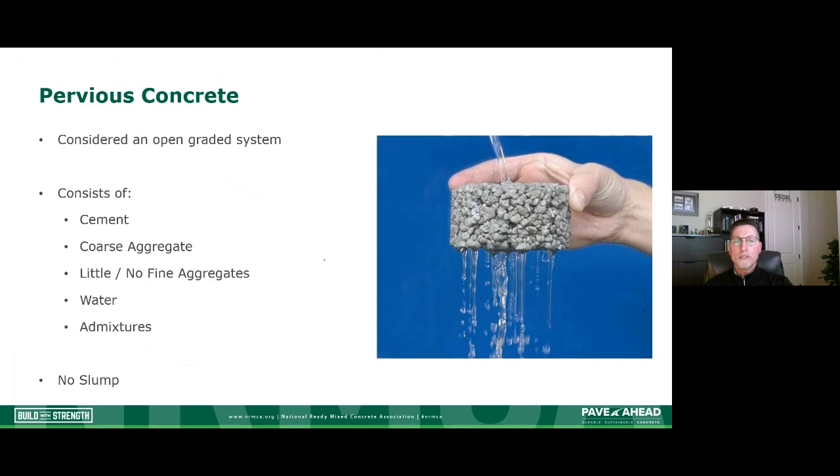This is what we'd consider a sustainable material because it's an open graded system and allows water to flow through it. And when we allow water to flow through it as runoff from rain, it actually kind of cleans that water before it hits the water table.

So we're reducing our total suspended solids, reducing our metals like zincs and irons and things like that, and also nutrients from runoff that comes from fertilizers and things. We're kind of capturing all of that stuff here, retaining it here, and by the time the water hits the water table, it's clean.

So a lot of different ways in which we can impact our pavements in terms of our environmental impact, just by using low impact materials. And we can also use recycled materials and things like that. So there's a lot of ways that we can impact our environmental burden.

Let's talk about things that we might do to lower the environmental impact during the design stage, and then also how we might improve resilience. One way that we can do that is just changing the way that we do pavement design. Eric did a great job taking us through the pavementdesigner.org.

So he gave us kind of an overview of how we might do a pavement design. And typically what we do in pavement design now is this: we say, all right, I'm going to start out with my climate, my soil conditions, my traffic, my concrete strength, and I'm going to evaluate that against some performance target. The performance targets that Eric was talking about was fatigue life and erosion and faulting. Okay, so we look at a set of pavement layers and thicknesses, and we analyze whether or not it meets our performance requirements.

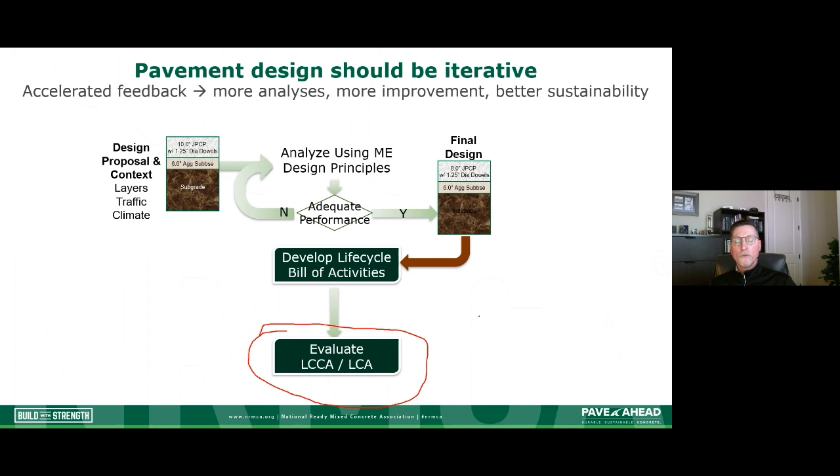So what we would do here is we would say, all right, we're going to start out with some inputs. We'll evaluate those inputs, develop those life cycle bill of activities, apply all of our cost and all of our environmental data, and then evaluate it in terms of our life cycle cost criteria and our life cycle assessment, our environmental criteria. So we establish those criteria and we say, well, does it meet that performance or does it not?

If it doesn't, then we go back up and we change our pavement structure and maybe the materials that we use to where we can finally kind of iterate on what would be our most economic and our most environmentally impactful pavement design. So if we change that methodology a little bit, we can be a little bit more impactful in the design stage and make sure that we are reducing our burden both economically and environmentally.

So if we do that, what we find is that, let's say we just did a couple of things. Maybe we used recycled materials, or we just went from 2 rehabilitation cycles to 3 rehabilitation cycles. We can see we wouldn't have a really significant impact in our environmental burden.

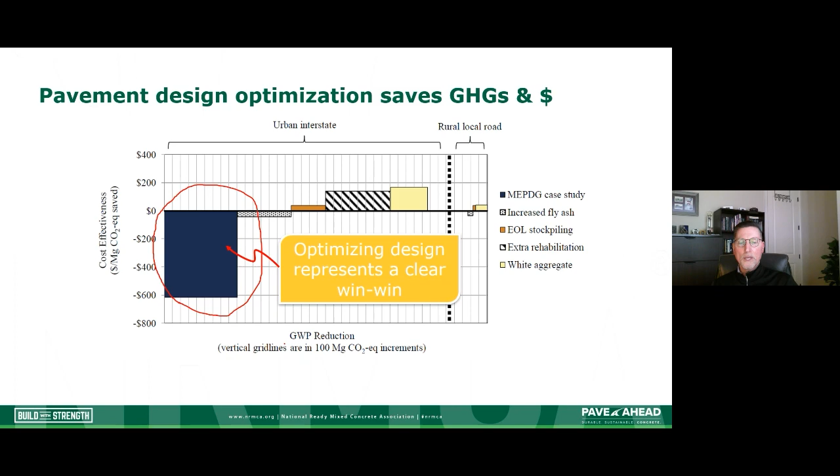If we optimize here in terms of that process I just showed, it shows that we could potentially have very, very significant environmental and economic burden reduction. So this represents a real clear win-win situation if we change just that methodology a little bit.

One thing I talked about was washout versus inundation. What research has been showing is that simply by adopting a hard, stiff surface, i.e. concrete, we can produce more resilient and potentially more sustainable pavement cross sections.

One city that has applied all of that knowledge is Riviera Beach in Florida. They tend to have a lot of coastal flooding from hurricanes or tidal changes, and they went through a significant rebuild of their sewer and water utilities. They went from an asphalt surface road to a concrete surface road because they found that their concrete surface roads in other portions of the city were performing much better, even when flooded. So simply using concrete helps in terms of resiliency and potentially sustainability.

In terms of designing for resilience, one thing we can also do is base our designs on the weakest subgrade condition. Think about a subgrade when it's completely saturated, with a significant amount of water and moisture in it. Generally, if it's a clay or silt subgrade, we'll see very significant loss in strength. So if we design for a very weak subgrade, we can make that pavement cross-section more resilient.

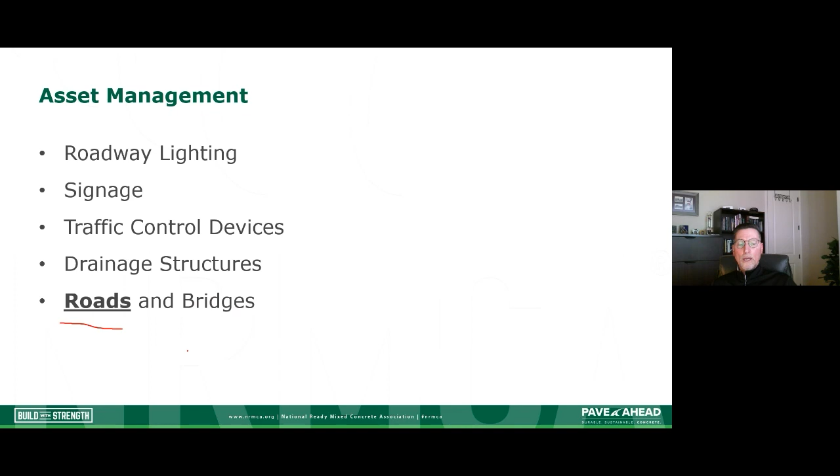So that's the design phase, where we can impact sustainability or resilience. Now let's look at the asset management stage, or the use stage, or the maintenance and rehabilitation stage. In asset management, over time we take snapshots of how well infrastructure is performing, whether it's lighting, signage, traffic control devices, drainage structures, roads, bridges, whatever the case may be. We're interested in how we can impact things from a roads standpoint during our asset management decision-making stages.

When we're talking about pavements, asset management is really what we capture in our pavement management systems. We gather a bunch of data about our pavement structures: the thickness, how well they're performing, how long they've been there, the maintenance and rehab cycles we've performed. We capture all of that data and segment it based on our network, getting a current state of the network. We can produce reports and performance histories, and all of that data can help us decide what maintenance and rehabilitation strategies to apply to make the network economical and sustainable.

Essentially, we take all of that gathered data, evaluate it, and predict what our performance is going to be going forward. Then we make decisions about the best treatments to apply to our pavement so it'll perform adequately over time, and we optimize that. Is an overlay the best idea? Is crack sealing the best idea? Is concrete pavement rehabilitation through grinding the best idea? We select the treatments and determine when those things need to be applied.

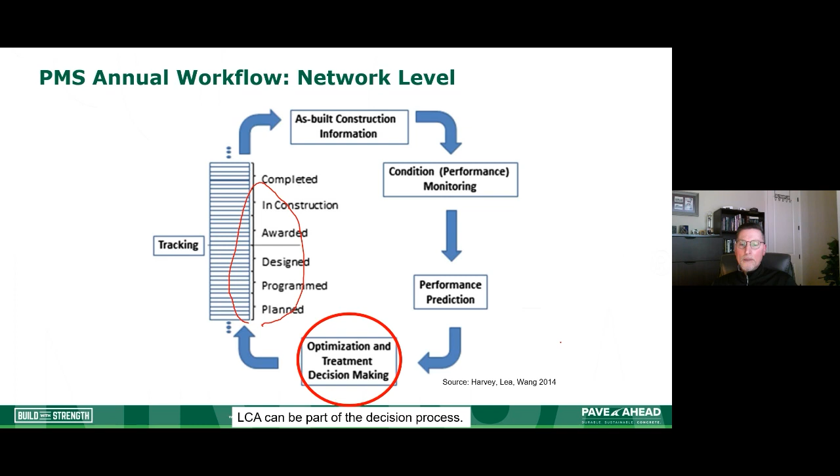So what might that look like? Here's our pavement management system, and we're going to evaluate certain treatments based on what it tells us. For each treatment, we conduct that LCA, and it tells us what our greenhouse gas emissions would be, giving us a full accounting of our life cycle on the environmental side. We can also do a full accounting of the life cycle cost for the economic side, and then make a decision about the best treatments and when, based on optimizing for the environment and for our economic considerations.

Other things we can do during that use phase—we've talked about all these different types of treatments—well, we can apply things like concrete overlays. They can be sustainable, and they can also help us on the resiliency side.

So how would that occur? Well, if we have a flexible pavement and we load it, that stress is applied all the way through the pavement. During a rain event or flooding event, these lower layers can become very weak, and we tend to see an increase in distresses because all of that stress is being carried in those weak layers.

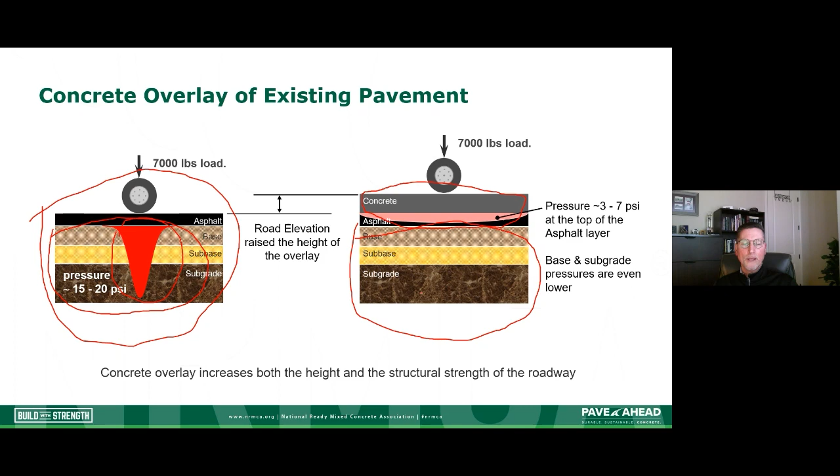We'll talk about concrete overlays in just a minute, but basically with overlays you're preparing the surface, cleaning it, placing the concrete on top, texturing it, curing it, and then jointing it—a fairly simple process we'll get into more detail on in the next segment. Another thing we can do is called full depth reclamation.

With full depth reclamation, we're changing these weaker layers into something bound and stronger. If it gets wet, the old layer would weaken, but the new bound layer wouldn't weaken as much, whether the water comes from below or from the top. We take the existing asphalt pavement and granular base, pulverize it, add a stabilizer, and then place a new surface on top.

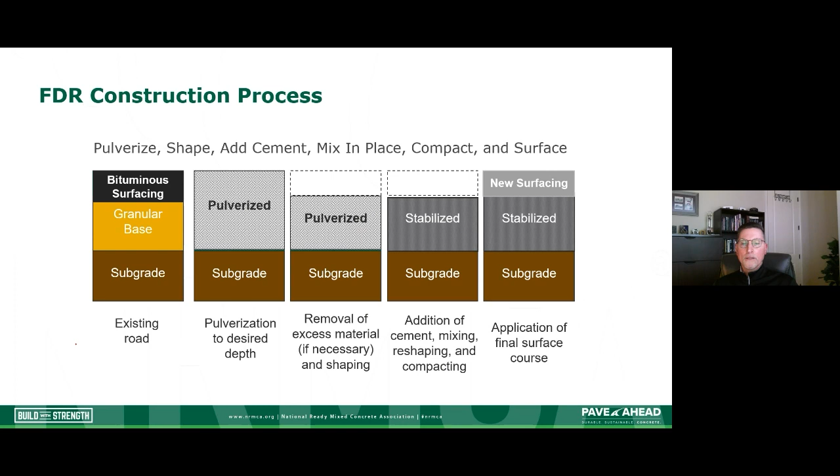So that's something that can be done during the use phase, the rehab phase. The very last thing we'll discuss is that when we make pavement stiffer, we actually reduce pavement deflection and roughness. When we reduce deflection and make things smoother, vehicles traversing the pavement can use less fuel, and using less fuel means a lower environmental impact.

Using stiffer materials can help us, not just on a single project but across our entire network, lowering our environmental burden and potentially making us more resilient. So in summary: resiliency and sustainability are good—they're generally compatible, but not always equal. We can disclose or quantify sustainability in different ways, and we can become more resilient and sustainable at different stages within our life cycle.

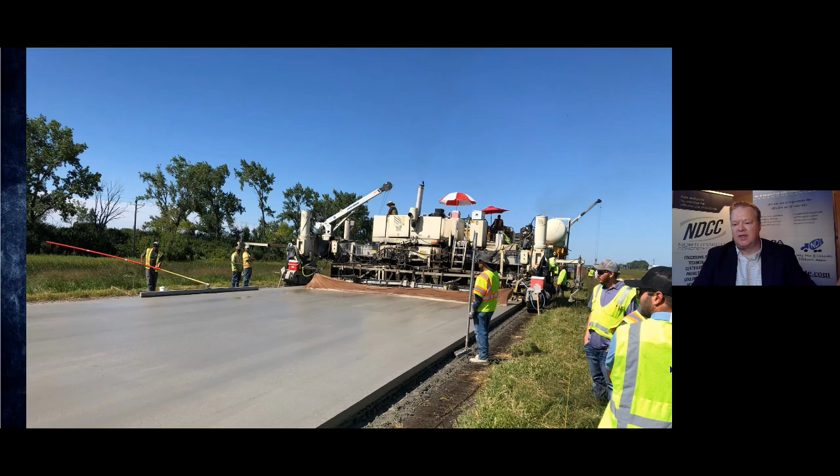So that will be our final presentation this afternoon when we have Todd LaTorella. Todd is my counterpart, the executive director in the Missouri-Kansas chapter of the American Concrete Pavement Association. Since I've taken over in this position, Todd has been a great friend and full of resources, and I really appreciate him being here today. In addition to the credentials listed on his screen, he's helped move overlays from a viable option from rural to urban areas, which is what we think we could have some benefit from here in North Dakota. We've asked him today to share some of the challenges so that we don't have to go through some of the hardships that they've learned the hard way. So with that, let's welcome Todd LaTorella to talk about concrete overlays in urban areas.

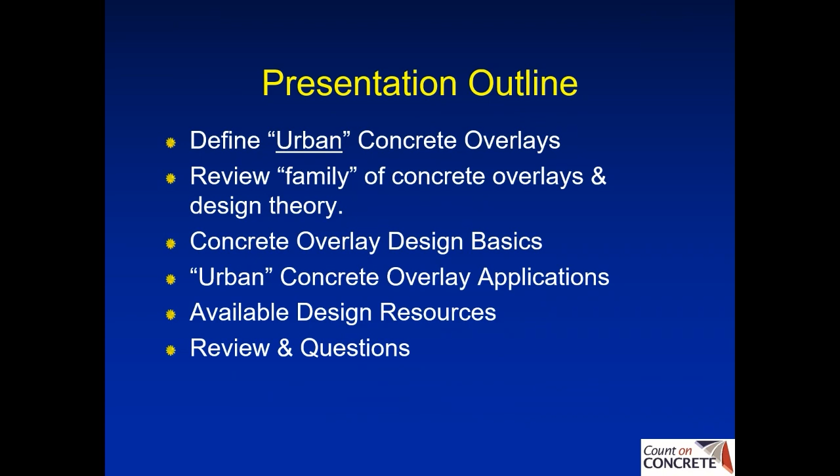So, my loose definition of urban concrete overlays is basically any application on a non-highway facility in an urban environment. This can include arterial collector streets, residential streets, as well as parking lots, and I'll show you examples of both.

Here's probably the biggest challenge and hurdle when trying to come up with a concrete overlay option in an urban environment: typically these overlays and applications involve profile grade elevation constraints related to existing curb and gutter, drainage structures, driveways, entrances, side roads, you name it, that will influence the design. It's easy out on the highway network when we have open ditches and can raise that profile grade, not tying into too many structures other than occasional entrances and bridges. That's a lot easier than in an urban application where we have existing infrastructure and have to hit all these hard points. This really differentiates urban from more highway and typical roadway overlay applications.

Now, real quick, just so we're all up to speed and on the same page, let's start talking about our family of concrete overlays.

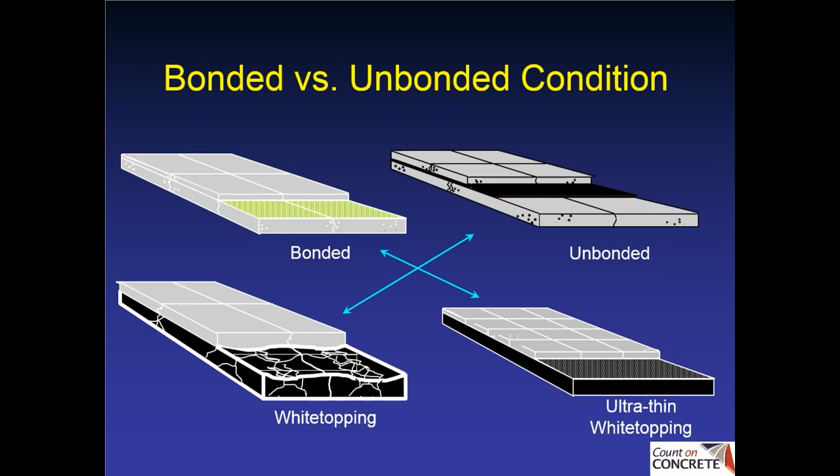So here we have our family of overlays. On the left side, we have our bonded overlay systems. When we design those, the bond is integral to the design meeting its requirements. The design works because it's bonded to the existing pavement in some fashion, and that bond remains over time, over the performance period of the overlay. Because we're building a composite section with that bond, these overlays are typically thinner. On the unbonded side, we're basically just using that existing pavement or substrate as a base, so we don't worry about bond. If we get some bond, that's fine, but it's not imperative to the design performing as expected. So those overlays tend to be thicker.

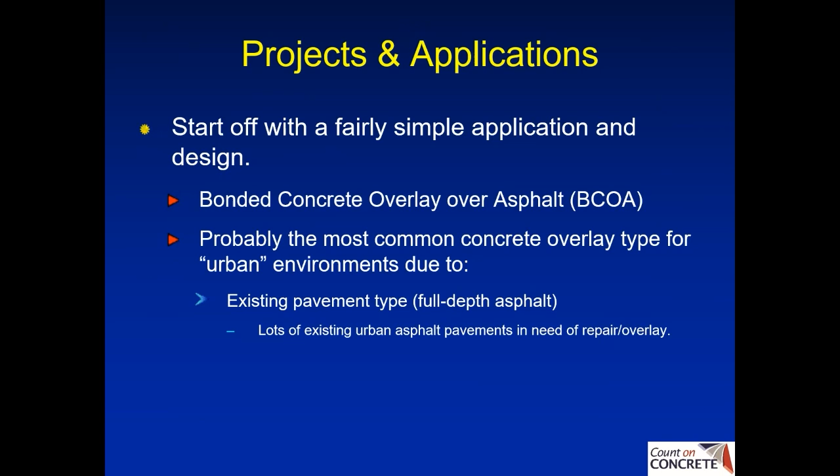I'll start off with a real simple one, just to get everybody's feet wet. We're going to look at a bonded concrete overlay over asphalt - that's our BCOA acronym. This is probably the most common concrete overlay type for urban environments, or probably any environment, for a couple reasons. There's a lot of existing asphalt roadways out there, much to our chagrin sometimes, but that's what the existing system is made of. 90% of the roads are asphalt, so we have lots of overlay opportunities in that market for BCOAs.

Profile grade elevation constraints are a little easier to deal with when we're dealing with full depth asphalt pavements. Asphalt pavements are a little thicker to start with than concrete pavements. It's easier for us to mill asphalt pavements to address that profile or elevation increase. And we don't have to worry about any embedded steel, dowel bars, mesh, or tie bars in old pavements that, if we get into milling concrete, we've got to make sure we're aware of. Sometimes that can slow us down or be more costly when milling concrete pavements with embedded steel and reinforcement.

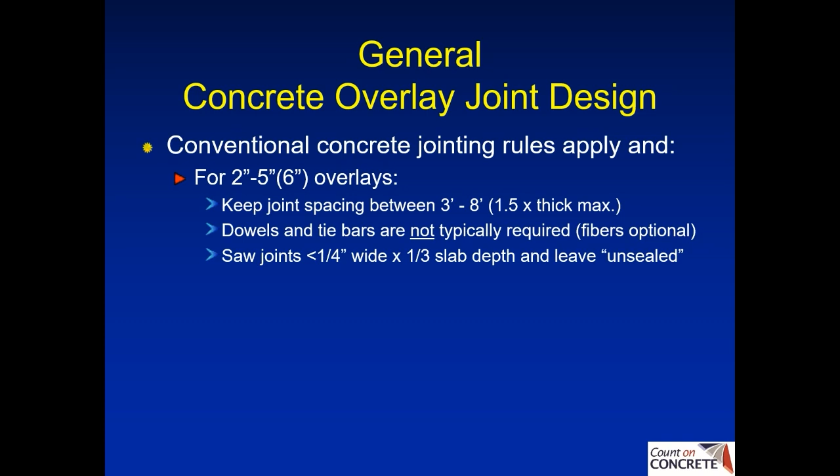Now when we get into overlays 6 inches or greater, 6 inches always that right on the edge sometimes, but typically overlays 6 inches or greater, we're going to jump back to that 2 times rule where we can. I would probably still recommend sticking to that 1.5.

When I work with my consultants on urban paving projects, even full depth concrete, we're definitely reducing the slab sizes, the joint spacing. If it's 8, 9, 10 inch concrete, we're going with 12 by 12 foot panels, and that kind of configuration, and we're really getting great performance. You see, if you shrink that joint spacing down a little bit, you'll see very little chance, a little risk of getting some uncontrolled cracking outside the joints.

And then you also want to be aware, as part of the jointing rules, the thicker the sub base or the base we're putting that pavement on, so the stiffer that is, the shorter you want to make that joint spacing. So we want to alleviate some of those bending stresses in the slab. So if we shorten the slab and we're on a stiff sub base or base material, we always want to be wary of that and shorten up the joint spacing and design some smaller panels.

Again, joints may be sealed or not, depending on the application. The industry still goes back and forth on that. I think a lot of us have some ideas about when we might want to seal joints and not. But for these thicker overlays, we can go with the conventional double cut joint construction and seal them, or we can stick with the single cut less than 1/4 inch and leave them unsealed. All right, so here we go.

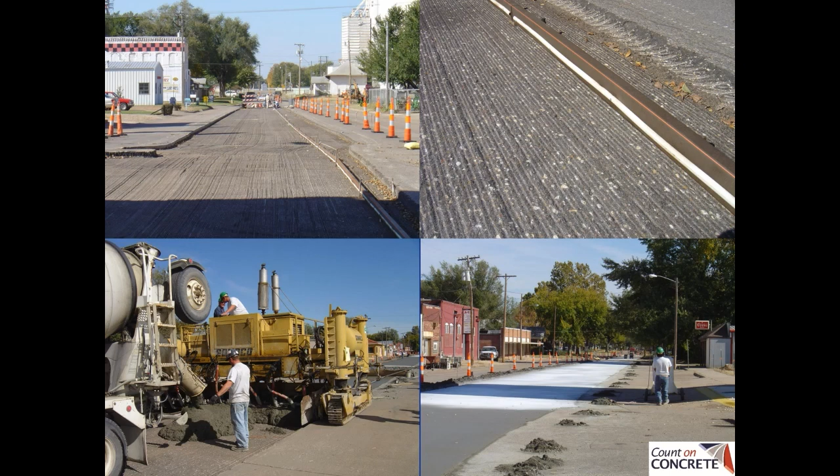This is basically the home of Dwight D. Eisenhower and his presidential library, a pretty small town, but it does have a grain elevator, and this road serviced the grain elevator, so we had lots of heavy trucks rutting the pavement pretty significantly. The city and the engineer came to us looking for a product to address that, so we ended up coming up with a 5-inch mill and fill with concrete.

You can see there's the milled surface. We basically did half the street at a time. You see on that upper right picture, we got that surface nice and clean, exposing the existing aggregate in the asphalt, and that's really what you're bonding to here, that existing exposed aggregate in the asphalt mixture.

You can see there we put up a little form, and they made a little keyway with a split piece of PVC pipe. Probably not necessary. I'm not sure if that was on there for another reason, another project, and they just use those, but we don't need that keyway there.

You can see we brought out the paver. Basically just went from one end of the job to the other. Bottom right, you see the curing compound. We always want to do a good job of curing with concrete, especially on these thinner overlays where we're dealing with a much thinner section. We're often putting it on a fairly warm material. That existing asphalt can get pretty hot sometimes. So we want to keep as much of that moisture in the concrete, get that hydration process to do its work to its maximum, so we get the most durable and high performing concrete we can.

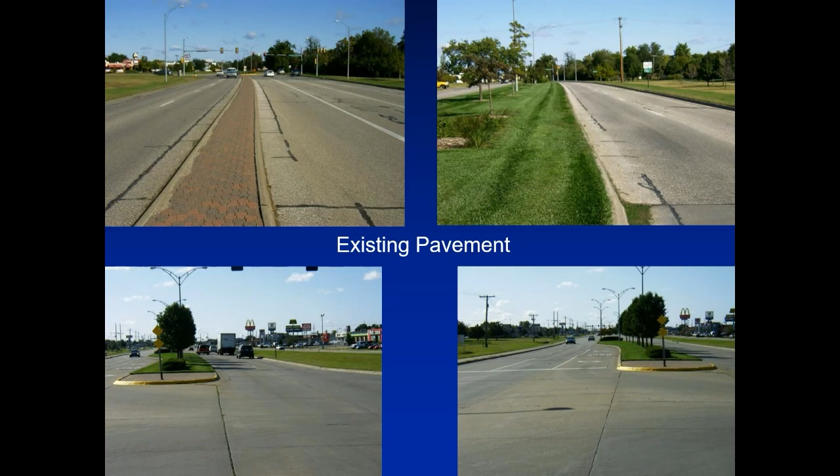Basically very similar to the previous project, we just went out there with the milling machine and milled that 5 inches off. It's kind of nice because you can mill one day, put traffic on that milled surface for days before, then go out, get it cleaned when you're ready to pave and place the concrete pavement.

Hey Todd, this is Art. Before you move on, I hate to interrupt, but we do have a couple of questions that came in dealing with this preparation slide, so I think it's timely to take a look at it. The first question is: do you need to mist the milled surface with water before paving the concrete? So once you have it clean, as you're showing, would you recommend misting it with water?

Yes, that's a very good point. We would definitely recommend misting the pavement. What you don't want to do is pond water on the pavement, but you do want to cool that surface down. That's a very good point. We don't usually specify this in the spec for these types of projects, but we do have a temperature requirement for the asphalt - we never want to place concrete on something really hot and basically cook the concrete. So we want to get that temperature down.

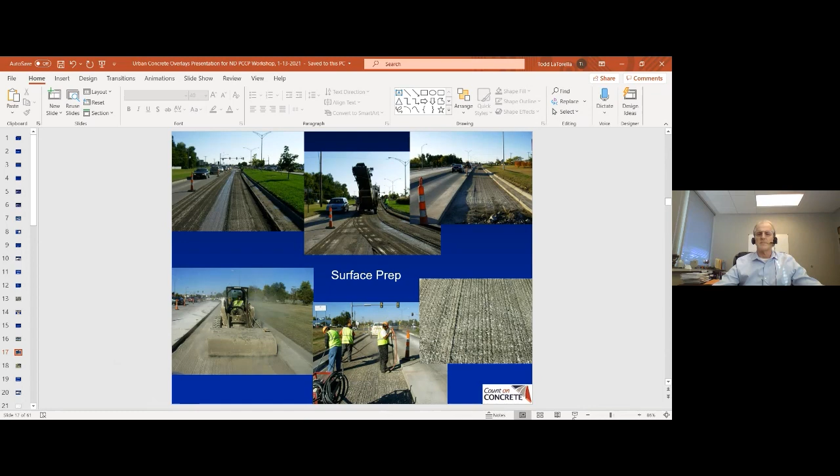Okay, was there another question there, Art? Yeah, one more, and then I'll let you get back to it, so I do apologize. No problem. The other question is: is diamond grinding for ride incentive specs required for all rural concrete road projects? And how soon can grinding be done after you pour an overlay?

Diamond grinding is really a function of the concrete strength. If you talk to our sister association, the International Grooving and Grinding folks, you basically want the full 28-day strength of the concrete developed before you do the diamond grinding. Usually you're hitting that design strength well before 28 days, but a lot of times the spec will say 28 days or full strength development of the concrete, which for us would be 3,800 to 4,000 psi.

I will tell you, we constructed some of the longest stretches of 6-inch concrete overlay in the country on I-70 in western Kansas, 6 inches thick, and we got super ride quality on that project without diamond grinding. One reason is when you only have a 6-inch head of concrete and you're placing it with a slip form paving spread, you don't end up with that hump - you don't have near that head of concrete making it kind of hump up behind the screed. So we really got super ride results, paving a mile and a half a day with that paving spread, getting super ride numbers without grinding.

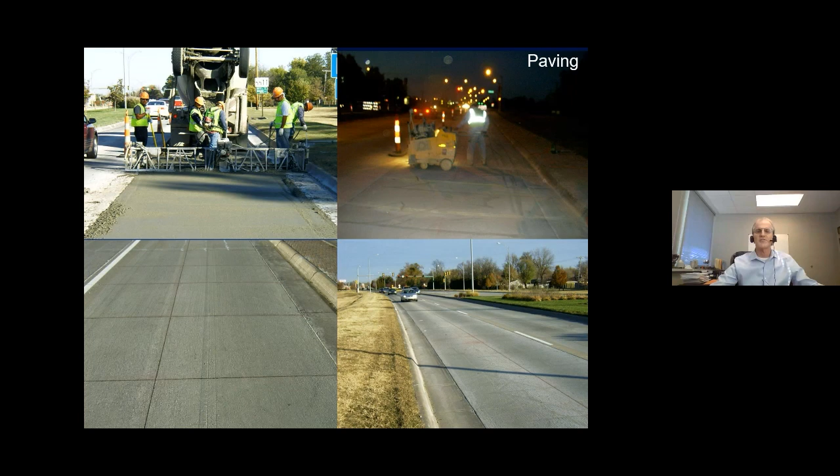All right, another project application. Here's a parking lot application. This is Twin Chimneys Elementary in Fort Zumwalt School District, in St. Louis, Missouri. This is one of our early projects where we did a concrete overlay on the existing school parking lot. We've now done about 30 or 40 of these over in the St. Louis area, and they've really turned out great. Got 3 or 4 school districts that really love these. So if you want more info, we have tons of info on these projects over in the St. Louis area. This project has about 120 spaces. It's got an entrance and a drop-off lane and a bus loop built into the parking lot that I'll show you in a minute.

For the design, we did 4 inches basically in the parking stall areas, 6 inch in the bus drive areas. So anywhere the buses were consistently driving, we beefed that up to 6 inches thick to address the bus traffic. Again, we use 3 pounds of macrofiber, no steel, 4 to 6 foot joint spacing based on the 2 different thicknesses. Single cut, less than a quarter, no sealant, no joint sealant. Very similar mix to UTW and white topping technology. And basically we characterize this as a BCOA in some areas and an unbonded overlay in others over asphalt, which I'll show you in a minute.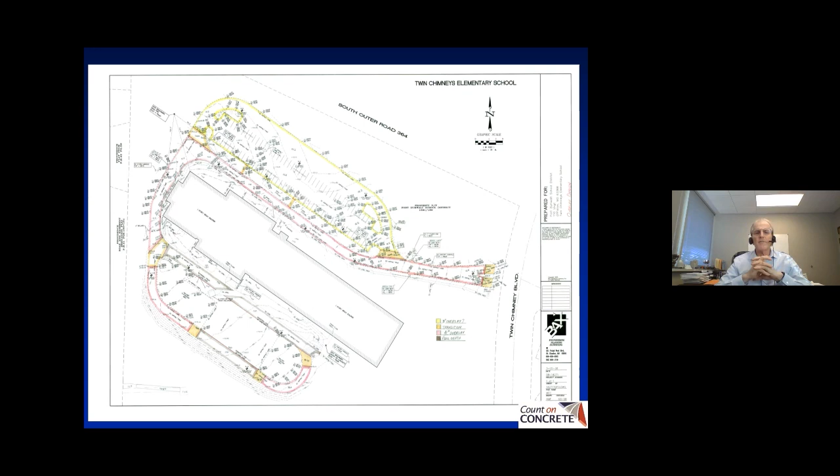This is a good shot because it really shows you, sometimes owners and engineers ask, well how bad a shape can the asphalt be in? It probably needs to be in good shape, right, in order to do a concrete overlay? And that's not the case in a lot of applications.

You can see here, this existing school district parking lot and entrance roadways, it was pretty badly oxidized. We had some rutting and some minor structural issues out by the dumpster, some potholes and moisture issues, some block cracking. So it's in pretty rough shape.

Really, this pavement wasn't that thick that we were working off. But the one beauty here is we were able to raise the profile grade when we got away from the school building, because we didn't have to meet a lot of existing structures or other objects once we got into the larger parking lot expanse. So that helped us with not having to mill down where we didn't have a lot of asphalt to deal with in the first place.

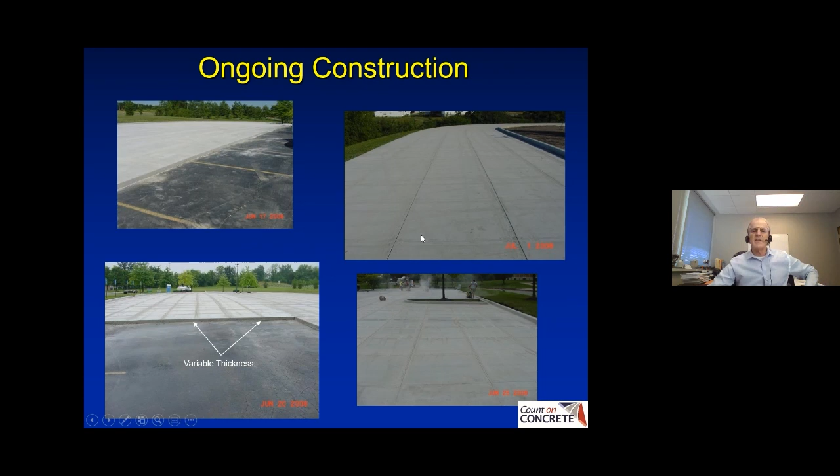So you see there, the finished product looked really good. Again, this was June 2008, if I'm reading that correctly. And this is really a good time to talk about the other item that comes up a lot as it relates to quantity and volume of concrete.

So here we have an existing pavement with a pretty good uniform profile and smoothness, both cross slope and profile down the road. If we design our overlay and they match up perfect, then if we spec a 4-inch or 6-inch concrete overlay, we're going to have concrete overruns typical to new construction. That's great, but that situation doesn't exist very often with existing asphalt pavements.

In this situation where everything works out perfect, it would probably work out if you bid this project as concrete by the square yard. You'd just say the project requires 20,000 yards of concrete, bid it at 4.5 inches for our volume, and put in one bid item for square yards of concrete placed and provided. That situation doesn't exist very often.

The reality is we have a surface with a lot of undulations in it. It's not uniform either from cross slope or profile, as asphalt tends to move around during the course of time. So we're not dealing with a profile that's close to our final profile.

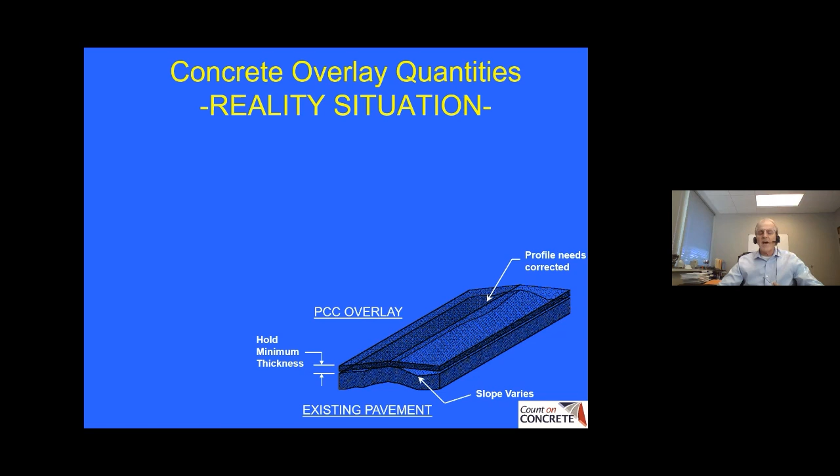When we drop that concrete overlay on there, you can see there's going to be areas we have to fill in with concrete to address the profile to meet our minimum thickness, smoothness, cross slope, and final elevations. That volume is the volume no matter what you fill it with, which is why I don't like to call it overrun. It's just the amount of material it takes to get you your final product and those minimums in terms of thickness, cross slope, and smoothness.

In this situation, what we'd really like to see owners do, and it really takes a lot of the risk out of the jobs for both parties, is bid the overlay with two bid items: one for placement of the concrete, the actual physical construction of the overlay, by square yards, and then pay for the volume of concrete on a cubic yard basis. This really is the safest and least risk for both parties. You're bidding the placement by the square yard and the material by the cubic yard, and that works really well for these situations.

And then you don't get into those arguments at the end about, hey, we used 25% more concrete than we thought, which can happen - that's a realistic number. It's just basically addressing the challenges and issues with the existing profile.

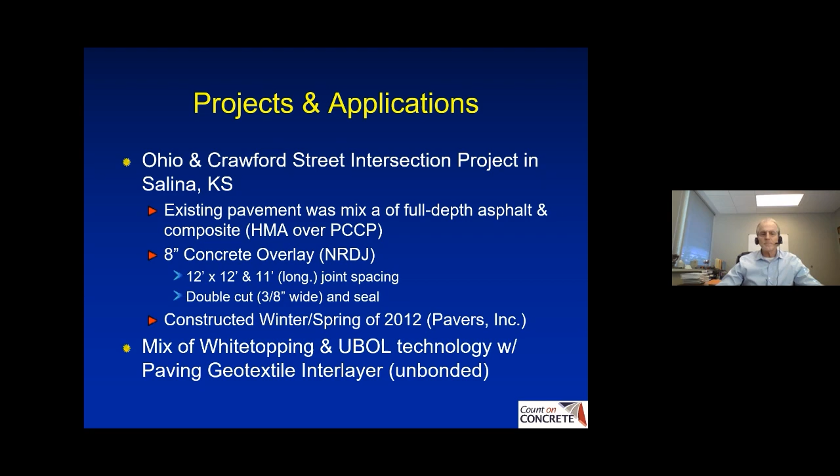Purpose and need - I'll give HWS, or my friends at Benesch Engineering, credit for this. This was out of their presentation that they gave at one of my events down here about how they came up with this design. So the purpose and need: the pavement was in really rough shape from a condition standpoint. It needed some type of rehabilitation. Very high volume intersection, probably the highest in Salina at 35,000 vehicles a day.

They were having a lot of recurring maintenance, which was the purpose of the project. One of the goals was to eliminate that and reduce that maintenance. And they needed it for a detour for another project in 2012. So they wanted to get this job done because they wanted to use part of the detour for another project that would be using this intersection.

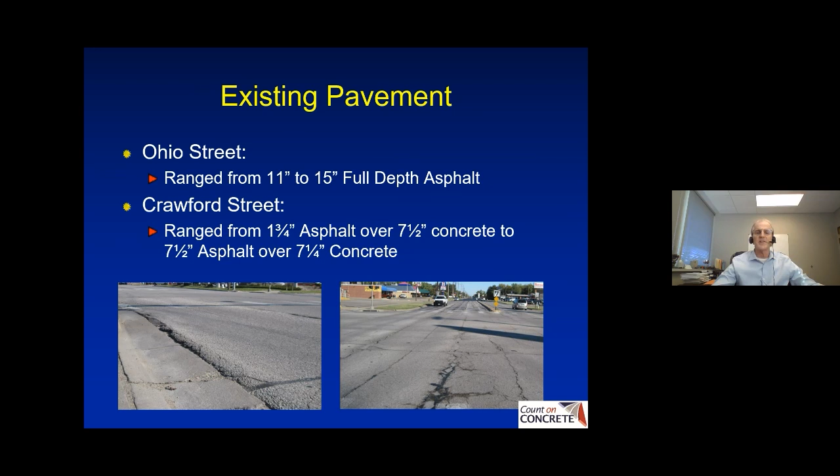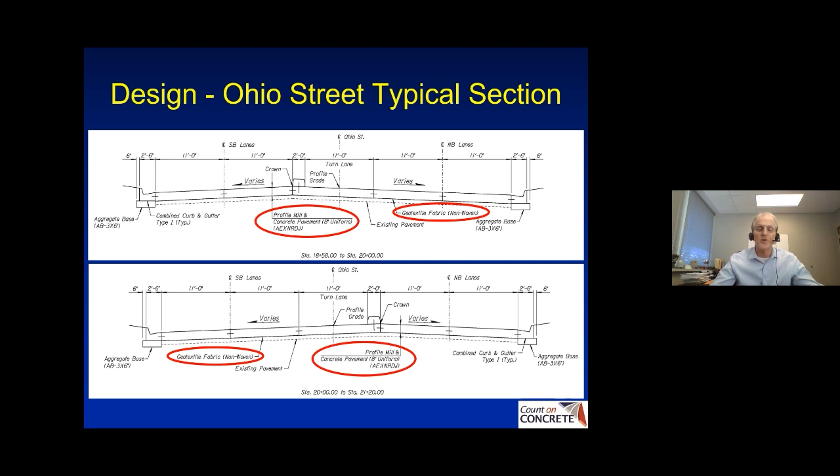Here's the typical sections for the street. Here's Ohio Street. You'll notice there we got the 8-inch dowel jointed pavement after we profile milled, and then we have the geotextile fabric. So in this area in Ohio, once we milled down, we were into existing concrete. Now we're placing this concrete overlay on an existing concrete surface. So we need that separation layer in there, that geotextile separator interlayer, to separate the new pavement from the old pavement, so we don't get any reflective cracks or joints coming up through the existing pavement into the new overlay.

Crawford Street now, this was full depth asphalt, right? So here we got our 8-inch pavement. And here, what we thought, hey, there might be some areas in this existing asphalt section where the milling machine's going to punch through. If that happens, what we're going to do is hog that existing asphalt out, regrade it, and throw out 9 inches of aggregate base with geogrid to address these sections. We're going to quickly install that, and then place the 8 inches of concrete over that. So that was our contingency for that. There you see the geogrid. So it was kind of a mix and match of overlay technologies again.

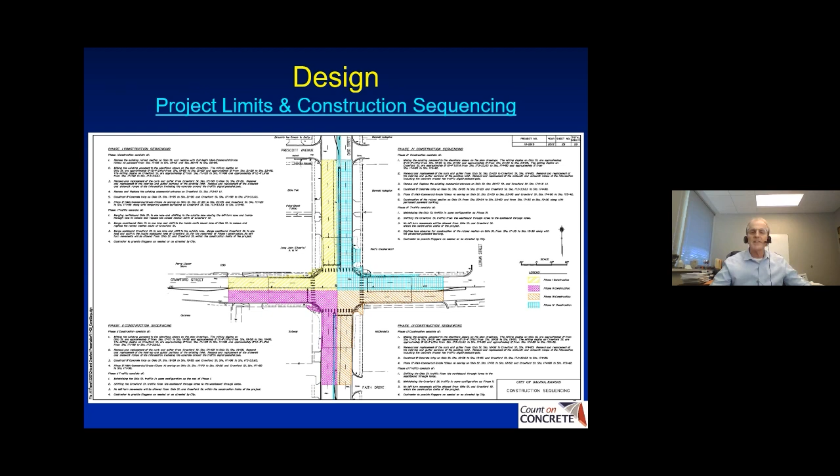Here's the construction sequencing, pretty standard quadrant type construction sequencing. We're doing it in 4 phases, each quadrant at a time. Traffic was reduced to 1 lane, so we're talking maintenance of traffic. We reduced traffic to 1 lane in each direction. No left turns allowed at the signals or entrances in the work zone. 20-mile-an-hour speed limit, and we actually had the police force out there monitoring the project.

And you can take this one for a plus or a minus, depending who you are, but they wrote over 500 traffic tickets during the course of this project. I'm sure that upset the folks that got the 500 tickets, but that probably brought in quite a bit of income to the city in violations and fines paid. So even with the 20-mile-an-hour work zone and the cops out there, they still wrote 500 tickets.

Original contract was roughly $427,000, about 3,200 square yards of concrete, 400 tons of asphalt, which was the asphalt overlays they did outside the overlay section, tying back into the existing streets. Replace the curb and gutter, sidewalk, sidewalk ramps, inlet tops on all 4 corners of the intersection. And then also that cost included the base repair we talked about with the 9 inches of aggregate and geogrid that we specified if we ran into those situations where it was needed.

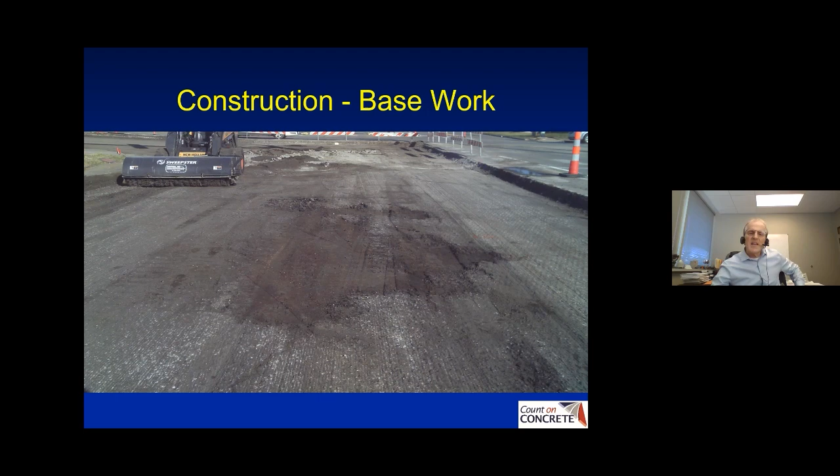Here's the area where when we milled down, we exposed the existing concrete. So we placed that geotextile interlayer down. You just roll that stuff out, nail it down on about a 6-foot grid with concrete nails and washers to keep that fabric down so it doesn't blow. This fabric's black, so for summertime placement, you want to cool that fabric down, so you always want to wet this black fabric down. There's also a white version where that's not needed, but the black version certainly absorbs heat. So we're going to want to wet that interlayer down beforehand, so we cool it down before we place the concrete. There's our dowels and tie bars being staked down. Concrete placement.

Nothing special there. Then we double cut these joints and sealed them with a hot pour. Nothing fancy.

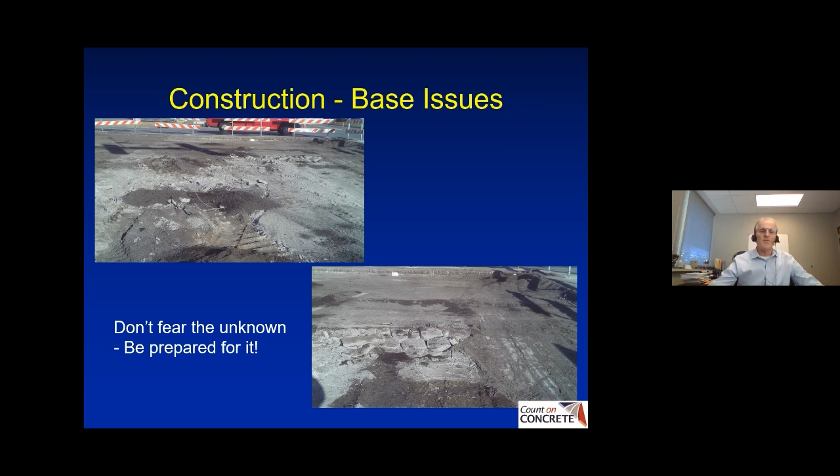Here's a situation where we ran into an issue with some concrete that was in bad shape that needed to be repaired. A soft spot, could have been a utility patch. You never know what's under there from work done over the years, so we want to make sure we have contingencies in the plans and specs to address these situations. Don't fear the unknown, be prepared for it. So there's that soft area I showed you before. We just hogged that out with the milling machine a little deeper and compacted some millings in there to address it.

Remembering once you get the 8 inches of concrete on that, there's no concern there. The biggest thing with these soft spots and distressed areas was, can they handle construction traffic? When we back that concrete truck down the grade, is it going to punch through and distort the base? We didn't want that to happen. So in a lot of cases, the existing pavement needs to be able to support the construction traffic, and that's the reason for the repairs, not necessarily for the concrete overlay performance itself.

Here's an area where they found basically a void under the pavement. Either an old water leak or a water main break, or for some reason we ended up with a big void underneath the pavement where you could crawl down in. The repair for this was filling it with a fly ash slurry grout, kind of a flowable fill type application. We had that set up, and then we could go on with the 8-inch concrete overlay.

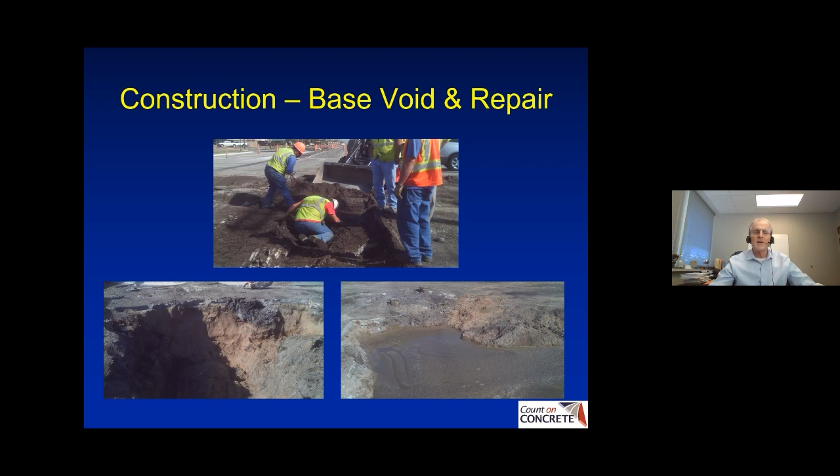It was open to traffic in 45 days. So despite the prognostication of Carmageddon, which didn't happen, we got the project open in 45 days. Basically got a 30 or 40-year product out there that the city won't have to deal with, and people won't have to be inconvenienced. You can see there we got one of those fast food places, an A&W there on the corner, so we have some businesses that are not going to be inconvenienced again for a long period of time. Hopefully by then people will forget we were ever out there, and I'll be looking forward to the next project 30, 40, 50 years down the road.

So just to sum it up, urban overlay success, what are the keys? Know what you're working with. We really need to know the existing pavement type and thickness. We need that for the design, but it's really important once we get into construction to make sure we have a contingency plan for situations that may arise with different pavement thicknesses or different pavement materials. You can't take enough cores - get your geotech folks out there, take some cores, know what you're getting into, know what you're dealing with.

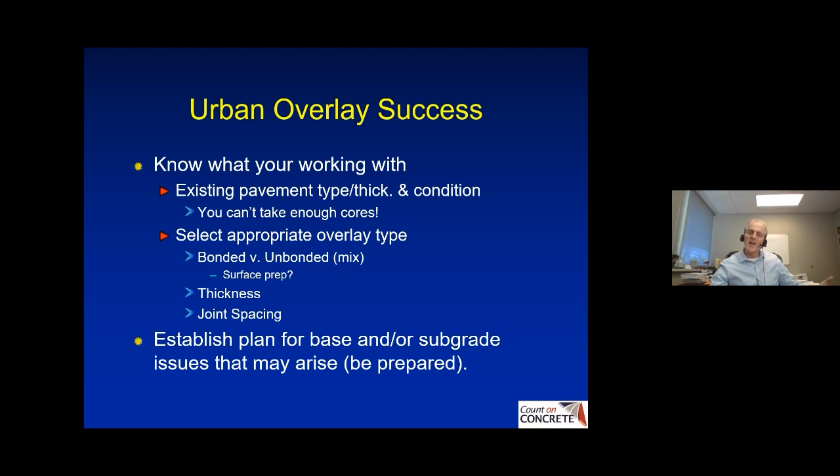Joint spacing, what's our overlay thickness? What's our overlay design? What are we putting on? Come up with our joint spacing. Again, establish a plan for base or subgrade issues that may arise. Be prepared, have a bid item for those things so we're not arguing or haggling about them during the project or after the project. Develop a construction phasing plan to minimize disruption and maximize productivity.

Knowing that the contractor may come up with something more innovative, the low bid contractor that gets the award of the job, so have some ideas or stipulations that the contractor has to meet, give it to them, and if they can come up with a more quick and easy way to construct the pavement in a better fashion with less inconvenience to the public and the businesses, why not let them come up with some innovative solutions that meet your criteria?

And always remember, sometimes it's better just to close the road. Maybe get the job done in half the time or a third of the time. Yes, the road was closed, but you get it done a lot quicker, may save you quite a bit of money on the project, and you tend to end up with sometimes a better product and a better project if you just close the road and knock it out without having to deal with construction and maintenance of traffic during the construction.

Again, establish a reasonable pavement opening strength based on design and traffic. I think we're finding as an industry that a lot of our agencies are coming to the conclusion that we can open traffic or open pavements to traffic a lot quicker than we ever thought. I can tell you in Georgia, they open up their interstate pavements at 1,200 PSI to 200,000 vehicles a day on the interstates around Atlanta. So 1,800, 2,000, certainly 2,500, you can open these pavements up, especially to lighter car type traffic where you don't have a lot of trucks.

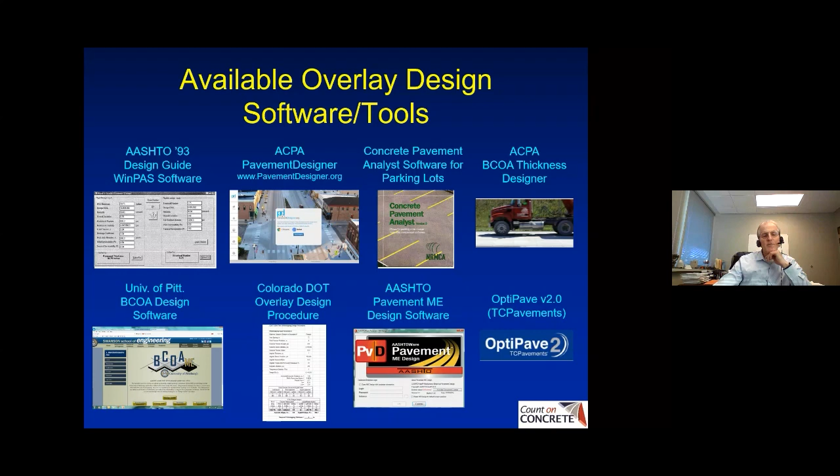You can go to the ACPA website and get a lot of those from their app library, at acpa.org/applications library. Just remember, it's a family of concrete overlays - really only 2 types anymore: bonded overlay systems and unbonded. It doesn't really matter what's underneath, we can come up with a design or an engineered concrete solution.